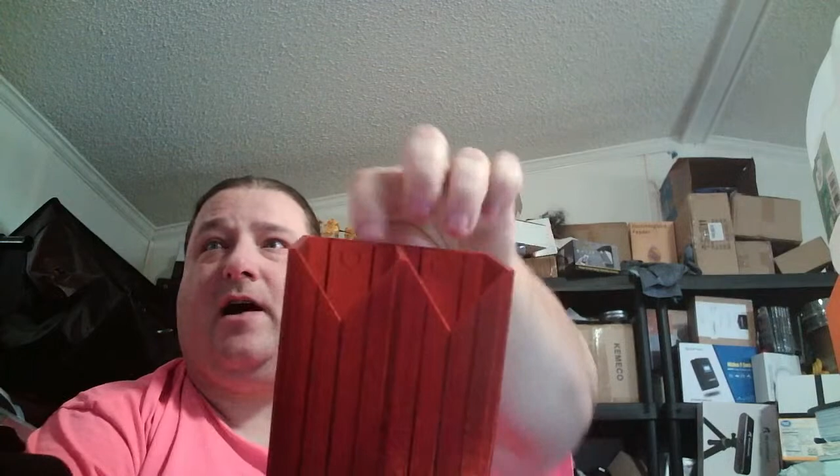But these files are all updated. I also did a 2 wide one because I actually need to have 2 wide for that little tiny wall I plan to put it on. So that is all done, all good. Because this one's only 2 wide, I have 2 spots for you to put screws in. So you could do one here, or you could do all 4.

But now it prints perfectly in vase mode with no gaps, no issues. This prints in about 6 hours. Anywhere between 5 and 10 hours, depending on how slow you run it. But yeah, that printed absolutely perfectly. I might round off some of these edges just to get rid of the sharpness at least on the bottom. I might actually do that, but that's just fine detail stuff. That's not super important.

I also might project these tabs out back a little bit because there's trim on the wall behind this. Although this might just flex enough that that's not a problem. But yeah, I'm gonna print like 5 of these and put them along that wall where the fridge is, and go from there. And the 3 one is updated. The 6-spot table one is all updated. So I'm gonna call that done.

Yeah, it's almost like the gremlins put it back out of fear for their lives. It's like, I'm gonna eat you if I don't find those things. It's only a 1,500 square foot house. Where the hell could the stuff be hiding? It's like, where can it go?

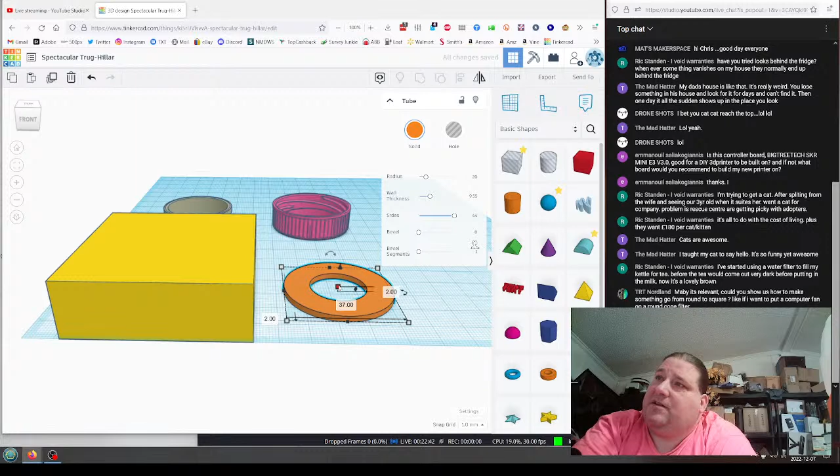So here you have, let's see, what's the normal size? The normal size would be a 40 millimeter fan. So let's say we have a 40 millimeter circle shape and we want to mate that to a 60 millimeter square. Let's keep it short like that just to keep it easy. So I want to mate this kind of shape to this kind of shape. And I want to create an adapter to go from one to the other.

So how would I do that? There's a couple different ways to do it. The simplest is to just use a cone and then cut the sides of the cone. And I'm going to show you how to do that. So let's line these two up. Let's say I want to go from this shape to this shape. So I want to mount this square hole to this round hole. And this is the dimension of my round hole, and this is the dimension of my square hole. So I'm going to put a plane on top, and also get your distance. Get whatever distance you want.

I've never seen a cap permanently attached to the bottle. So that's either not common in the US or not common in my part of the US. Remember, the United States is as big as the entire European Union. So you got to think of our 50 states as 50 countries. But I have never seen a cap. Yeah, basically. But I've never seen a disposable bottle come with an attached cap. I've never seen that.

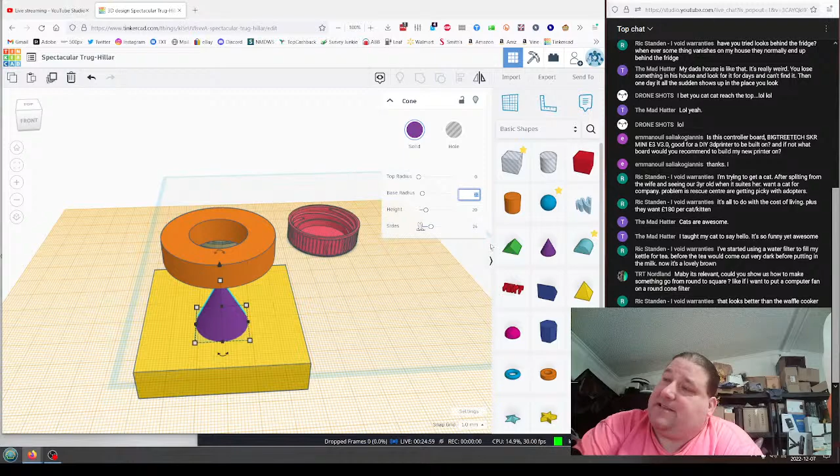Okay, so what I would do is I'm going to take a cone here, and I'm going to make the bottom of the cone bigger than this square. So let's make the base radius 30? No, 40. And we want to make sure, okay, it's not big enough. Let's grab all these and line them up. So you want to keep making this circle bigger until it's as big as the square. So base radius, let's go to 45. There we go. We are now bigger than the square. All right. Let's increase the height.

We could actually just do this. We could increase it until it covers it up. But before we do that, let's put our cut on top here, right there. And then what we do is we keep increasing this until it just covers up the part. Just like that. Now we put a cut box like this to get rid of the excess off the top. Make sure you have all four sides. Okay, there we go. We have our tool there. I'm going to lift this up a little bit to separate it.

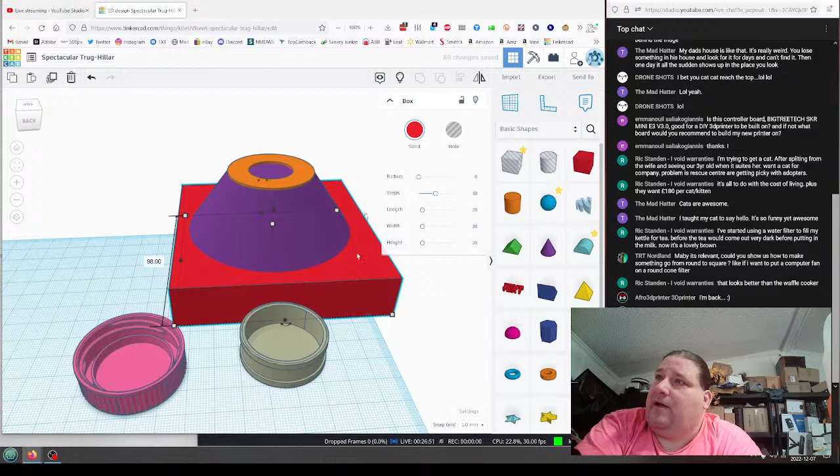Now, I'm going to take this and duplicate it. I'm going to hide one. I'm going to turn this into a cut tool. I'm going to put another square down here, overlapping slightly. So now I need to make this bigger than the purple box all around. Okay. And I need to make this shorter than the box in there. What I'm going to do is I'm going to join those two boxes there, which is going to put a hole inside the red box.

I now take the red box, extend it all the way up through the purple box, turn it into a cut tool, and you can see what's going to happen here. See, it's going to cut away all the chunks of the purple that are bigger than the square. And there you go. Bring back the yellow. And now, as you can see, I have an adapter. You'll have to fiddle with dimensions and stuff like that, put a lip on it, stuff like that. But you get the basic concept now. I now have an adapter that will go from this shape to this shape.

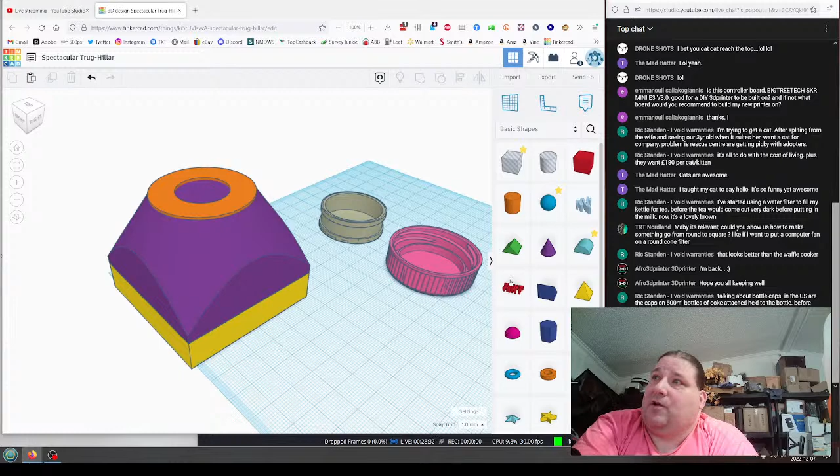Here we go. So that's how I would make an adapter to go from one shape to another. Now you could also make this finer if you want to. There are ways you can do that. So, for example, I could take one cone. Let's make this a big cone. Let's make it bigger than that. Make a big cone. Now watch, this is kind of cool.

Okay. So we're going to take this cone, we're going to duplicate it. Then we're going to raise this cone up 3 millimeters. Let's do a 2-to-1. So let's do 4 millimeters to give me a 2 millimeter wall thickness roughly. Yeah, that's good. Take this one here, make it a cut tool. And now join the two together. And now I have a hollow cone, which I can then put over top of these pieces like this.

And now what I can do is I can lower this cone over top of this and start chipping away. See how it's starting to chip away at different parts of the model? I can stretch it out if I want to change how it cuts away at the model. And you could do things like this to fine-tune the shape that you want to give your final part. And just make your wall thicker to cover parts sticking out like that.

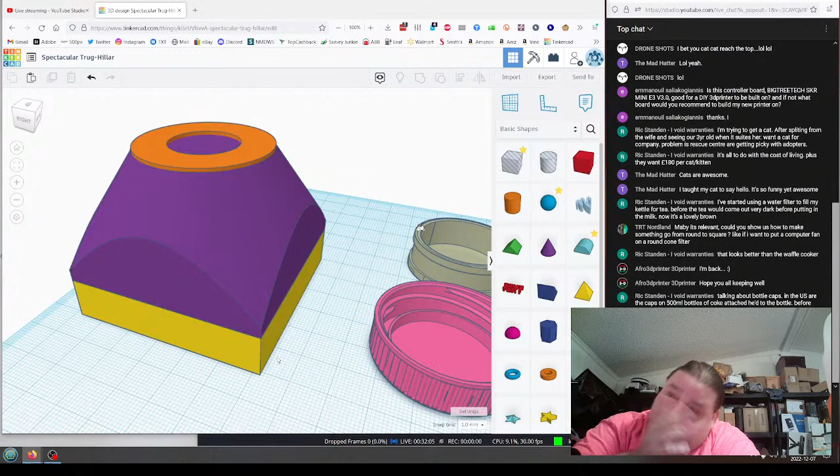Now, a couple other things you might want to do, depends on if you're going to vase mode print this. If you make this exactly the right size, you don't need to do this. But you could also put a small cylindrical section here if you need it. So either an insert or a cover. Same thing on this end. Whatever size opening you need. But this gets you roughly what you're going to want. I'm going to put that over here in case you have any more questions about that.

No problem. So, I want to make a funnel. So here's the screw-on cap. And here is this cap. So how does this work? I can't see what that's trying to show me. Let me try taking a picture and zooming in. Let's go high resolution for 48 megapixels. Let's use some light. Okay. Let's see what that looks like.

I can't really see it. I think I need to use a macro shot. Let's go macro. That's going to use this camera over here. So let me clean off that lens. Cell phone lenses always get dirty.

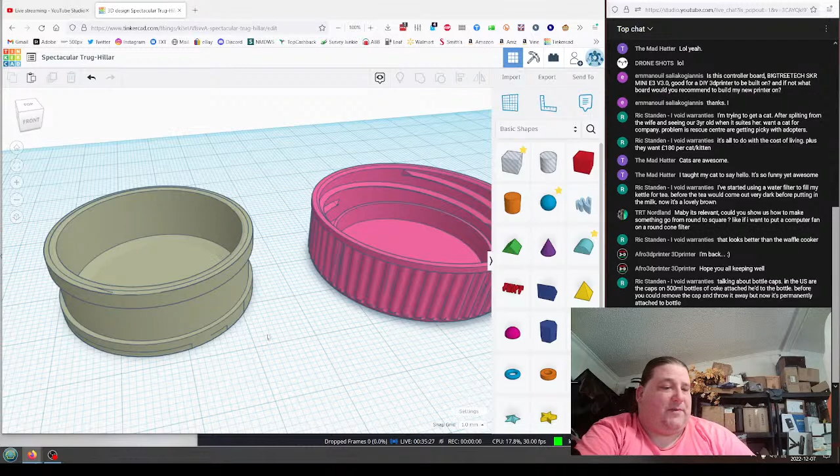Try not to be too noisy, okay? Sorry, I'm just trying not to be too noisy.

And it looks like the cap itself is just a lip. And it looks like it creates a seal around that part there. So that's how it creates a seal. Yeah, there is a small little dimple on the inside. Okay. You guys see what I see?

Yes. So the simplest beginning would be to simply put a cylinder over top of this. That is not what I wanted to do. That's what I wanted to do. Lift you up. Let's increase the number of sides. Why does it go to the opposite? Did you guys see that? I moved the mouse to the right and the freaking slider went to the left. I will never understand how that kind of crap works. Like, what programming syntax results in that?

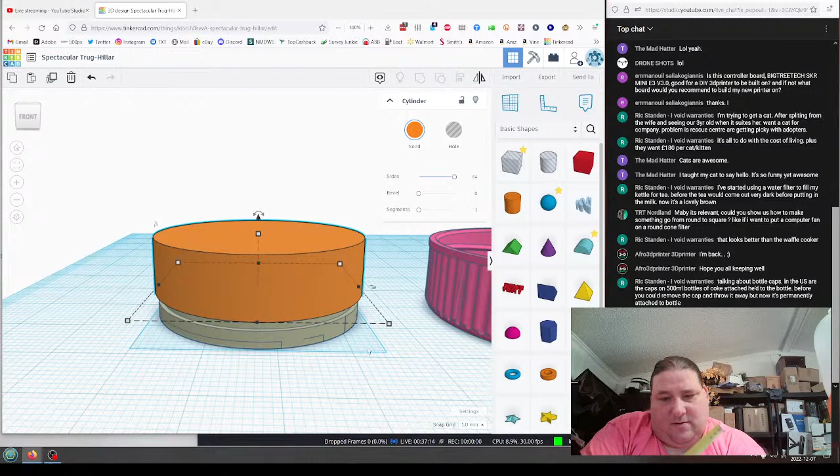Shift so we can scale it up, and we want to cover up the entire thing. Okay. How thick is this? Looks like the inside is actually deeper than the outside. And we go 6 millimeters. So let's make it 6. And we want to go by 0.5 millimeter increments. Okay.

So turn this into a cut tool and join them. Okay. That gets us pretty close. Let's bring you down to 0. Let's change your color. And let's put a cut tool in the middle here. This is arbitrary because it goes on the inside. So how big this is isn't super important.

And we want to lift this up. Let's go 1 millimeter high. Increase the number of sides. Let's align this. And now I should be able to do that. Okay. So that gets us roughly the shape we want. And if we make this transparent, we can see inside here. So something I want to do is I want to bevel that, but do I need to? Or is the bevel on the bottle itself enough?

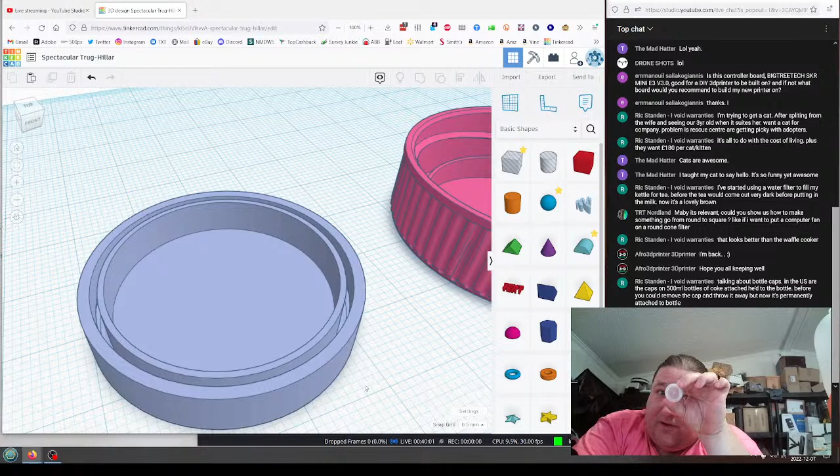Meaning, will that fit? Now, I could just use an existing cap. I could just cut the center out of that cap right there. And then I could design my cap to slide right into the hole I make by cutting out that center. And then just hot glue it together. But I'd rather print it.

The question is that... I guess the only way I'm going to be able to find out is to print it. Now the good news is I should be able to design the funnel separate from the cap, so I can edit the cap if it doesn't fit right.

No problem. Good luck, DeWet.

And my fit doesn't have to be perfect because we're just making a funnel. So how big was that? So 28.75, which means I can punch straight through this. Like that. Okay. Now let's build a funnel.

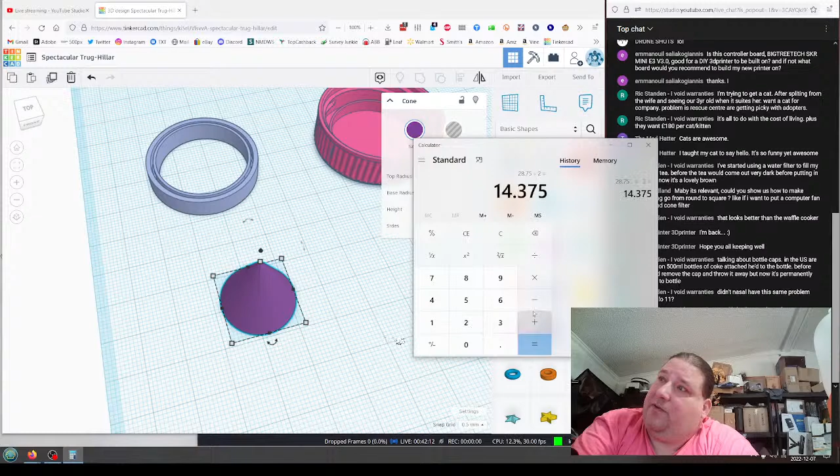28.75 divided by 2 is 14.375. But actually, no, I need the hole to be 28.75. I need the funnel to be the size of the entire cap. So 34.55. 34.55 divided by 2 is 17.275. So our top radius is going to be 17.275. And our bottom radius is just going to be bigger. So that would be fine. And that would be a good height. Let's make the radius a little bit bigger just because we can.

Put the plane here. Bring this up. Bring that down to 0. Really? Go away. Center you there. Be a pain in the butt. Okay. Let's change that color since that's a pain in the ass, that color. And that is a more than big enough spout.

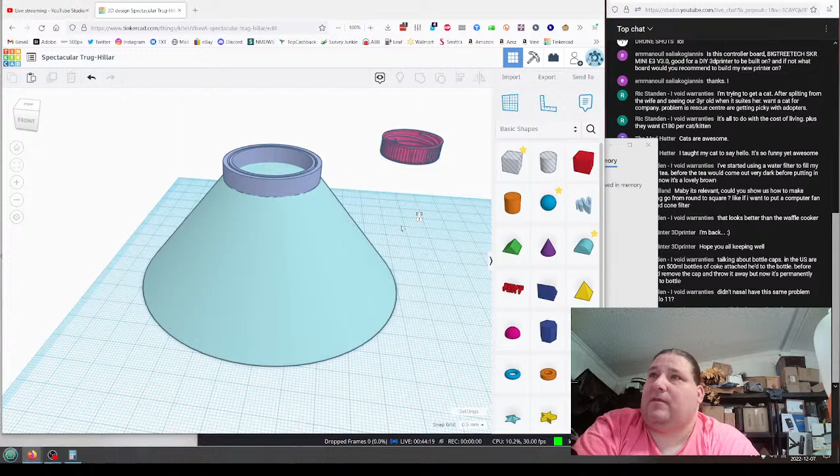Okay. Let's see here. How do I want to do this? I'll use my vase mode trick to give it some thickness. Which means I need to put a... so this needs to be... seriously, come on. What's that?

Oh no. How do I want to put the cone shape in place? I think I just need to... see, the problem is I created this shape. And I think to do what I want to do, I need to use a cone. Like an actual cone.

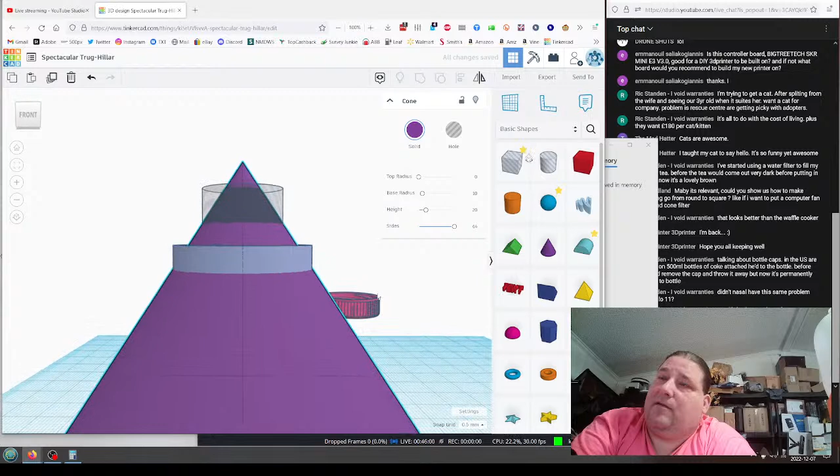90 by 90. Now let's center everything. Okay. Okay, that takes care of that. I don't need that right now. Okay, now what I need to do is I need to duplicate this, change its color. I need to move this. This one's the right for the outside. So I need to hide this one. I need to bring this one back. I need to center this one again without moving this.

And then what I need to do, why would you do that? Where the hell did you even come from? I hate when it does weird things.

So, we need to lower this until it touches that. Turn that into a hole. Restore the other one.

Seriously? Seriously, you grabbed it? No, you didn't. It's over there. Okay. I was about to get real nasty and bite it.

There we go. There creates the wall for my cone. Alrighty. Now I need to chop the top off. So let's go away. Hide this. Put a work plane here. Put a cube here. Put the work plane on top of the cube. Restore the cone. And now cut the top of the cone off.

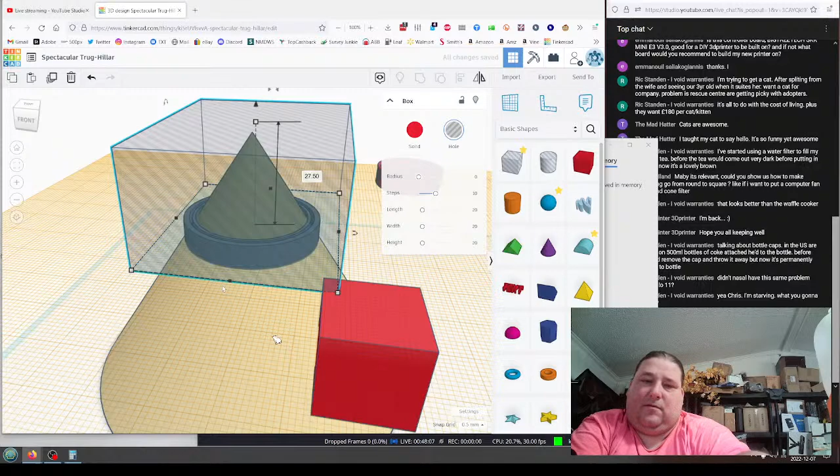We are making a funnel that will snap onto the top of these water bottles so that when I distill my own water, I can make it easier to pour the water into these things. These water bottles don't come with the threaded caps like your normal milk jug comes with. And you don't want to use milk jugs because you're going to get that milk protein in your water. So these come with the push-on, push-off caps, which nobody has modeled, so I'm trying to model it.

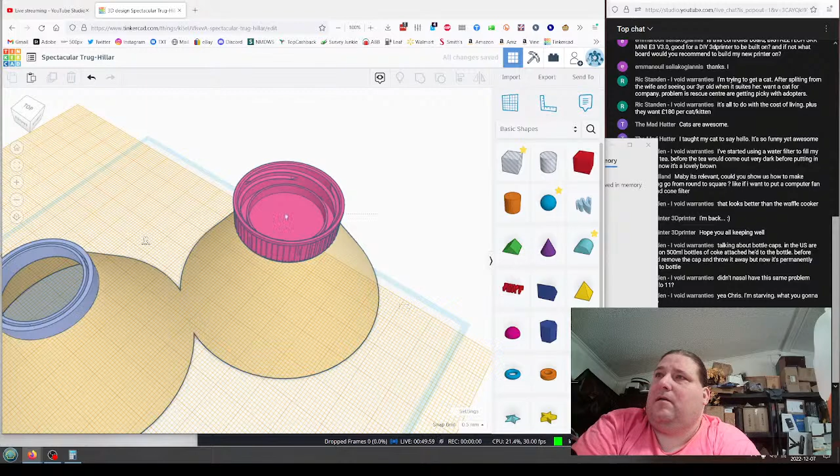Okay, so now I can delete this. Put the work plane back down here. And now I have a hollow funnel that fits the milk jug cap. And I think that'll work. Okay. Well, let's put the work plane back here because I can do the same thing for this one. 0. Control D. Okay. There we go. And now I just need to put a hole in the center of this.

Okay. So now should just be able to scale this up until it's the size of that opening right there. Join those two together. There we go. And that looks good. Although that might not print too well. So an easy way to fix that is to put a donut in place. We will shift that donut down like this. Sides. Let's center everything again. Center, center.

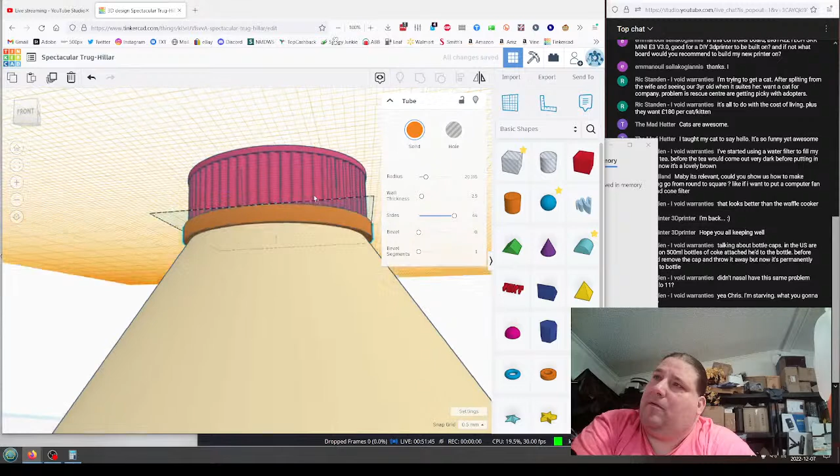So we take this and we extend it. Come on, work with me here. There we go. We extend that into that one. Change the radius to 19.8. Let's go 19.5. That works for me. Although it is poking its ugly head in here, which we don't want. But there's a way to fix that.

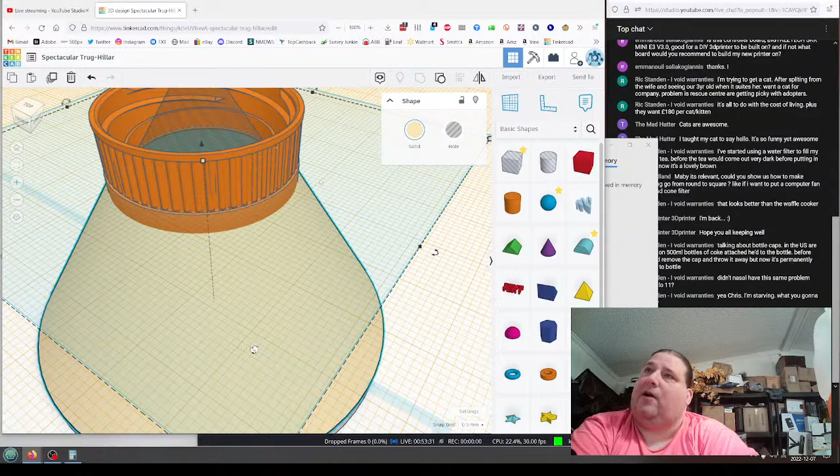We take this, we decompress it. I need you to go away. No, I need to decompress you again. There it is. Okay. You need to temporarily go away. Let's increase the wall thickness just a hair. I should be able to join the orange with the pink. Let's restore the block. Let's join this with this. Why didn't that work? Join this. Oh, I did. It did work. And now if we join all three of these, we'll get our cut in the middle there.

There. Now we have a threaded milk cap attached to a funnel. Now I do need to do one more thing. How do I want to do this? Let's join this one together since we're pretty close to what we want. Now I still need to create the aeration. I need to allow air to get through there. I think the easiest way to do that is to use the side here. Like that. Yep. Now we take a tube. We're going to have to rotate it 90 degrees.

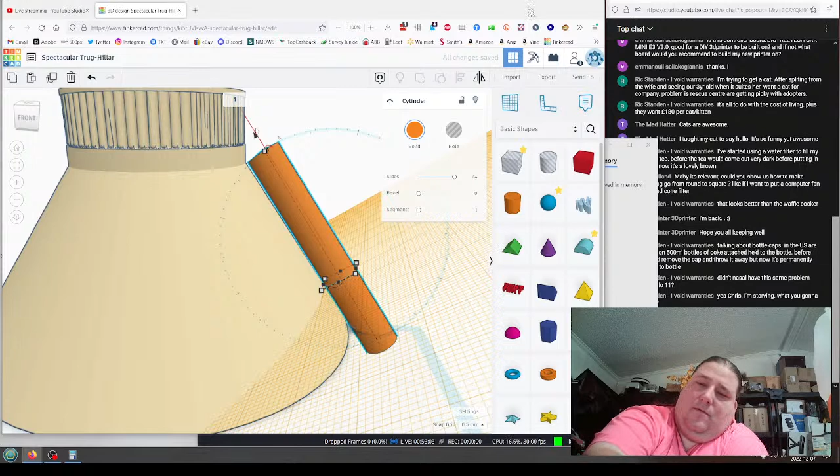Put the work plane here. There we go. Sides. Come on. Come on. Just grab the goddamn thing. So let's make it, 8mm should be enough. That is not sitting at the right angle. Well, isn't that interesting? I thought I got the angle right. Oh, it's between 1 and 2 degrees. That's close enough.

So now I bring this in here like this. Flip it over. Let's align these this way. Okay. Why doesn't that look centered? That does not look centered. Let's try a different method.

Jesus Christ, stop it. Why does it do that? Why does it go left? I don't understand why the hell it does that. You're going to get bitten because I want to bite you. You exist.

Okay. I might be able to just do a straight tube straight through like this.

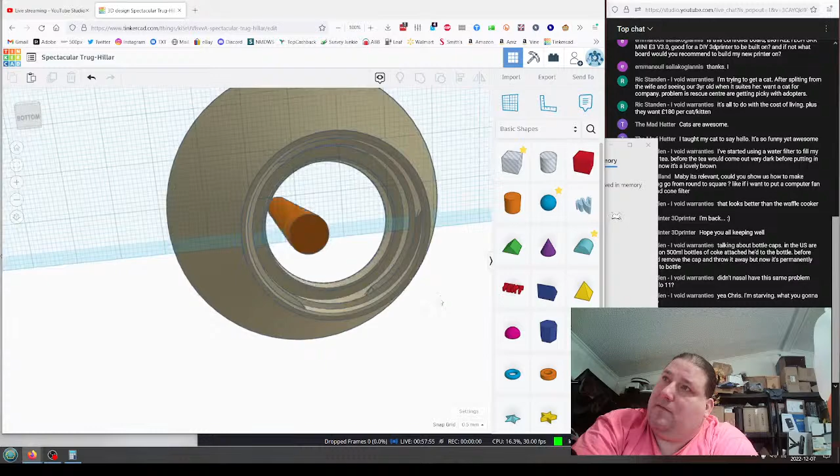Okay, so now I should be able to rotate this way. Okay. No. All right, that's looking good. Okay. Ow. Can I make it? I'd like to fatten it up. Yeah. I like that. Let's make sure it's still centered. Okay.

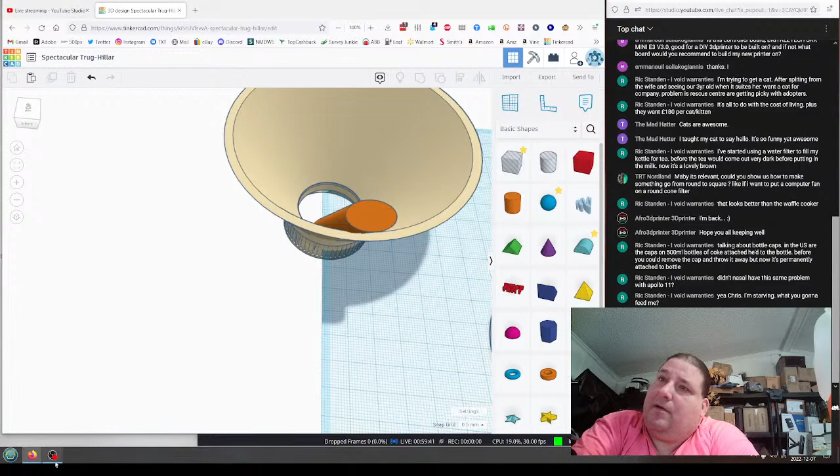Don't need that. Do I have the right screen on for you guys? Yes. Okay.

Get you out of the way. Bring you into the middle here. Let's put you on the end cap here. Control D. Let's change you to hollow. Let's increase the length like so. Let's hide you. Let's grab your center point and make you bigger.

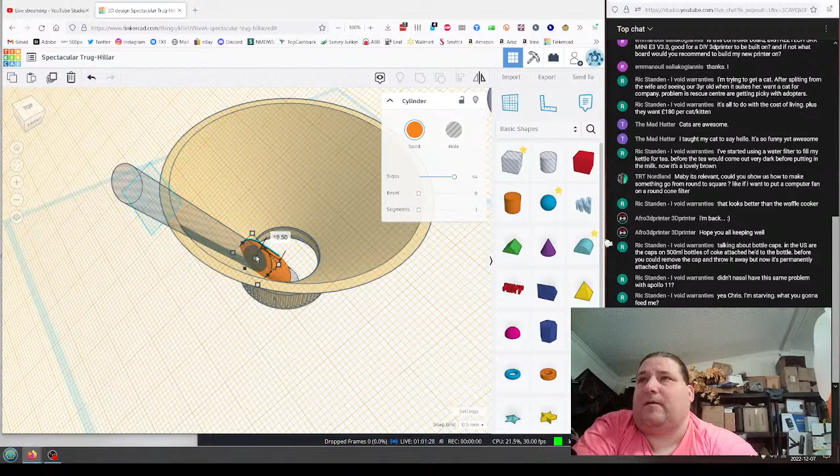Yeah, it's a little harder than I thought. I think what I need to do is to shrink you. Got it. Nope. I don't got it. There it is. Now I need to make you bigger so we have some wall thickness. Now I can make you longer. Okay. Live with that.

Join that together. Okay, let's put a plane here. Nope. Put a plane here. And chop off the top of this tube. Okay. That gives me that. Then... Nope. Okay. Come on, work with me here. Why are you fucking with me?

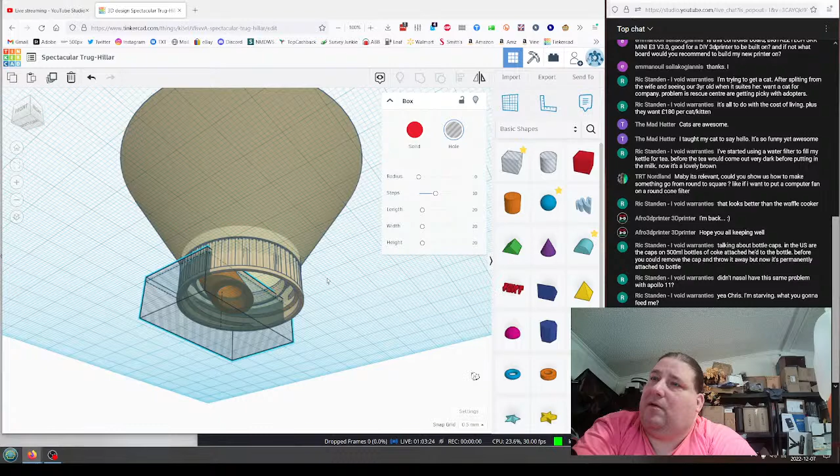Boy, sometimes just trying to grab pieces of things in Tinkercad can be such a pain in the butt. It's like, play nice or else I'll kick your butt. Wait a minute. I know what I need to do this. I don't know if I can do it. I want to try though. It's not what I want to do. What? Oh, I know. I know what I need to do.

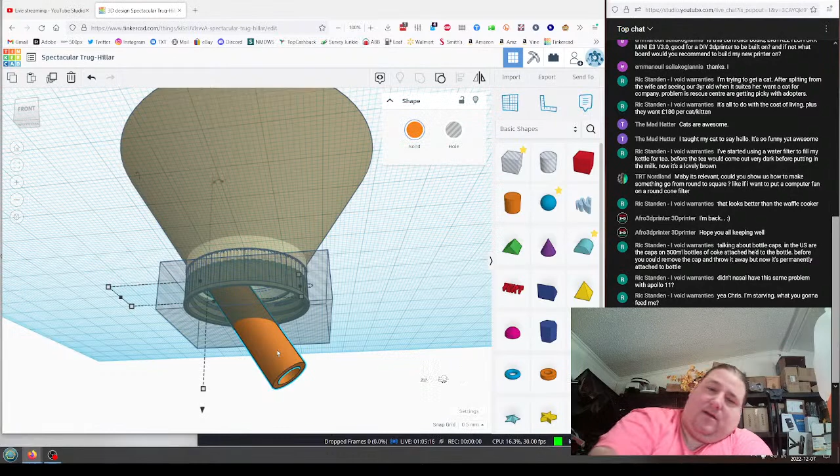Oh, it doesn't want to play nice. God, it can be such a pain in the ass sometimes. There we go. Man, can be such a pain. Go. So, I need to chop this into 2 pieces. Okay. Control D. Now I have 2 of them.

So I need to take this and this and chop it in half. So now I take that box and this piece, merge them. But I forgot to duplicate it first. Control D, merge it with this. Now we take this and we flip it this way. And we merge that one with the orange one. Come on. Figure it out. There you go. Now, here's the cool part.

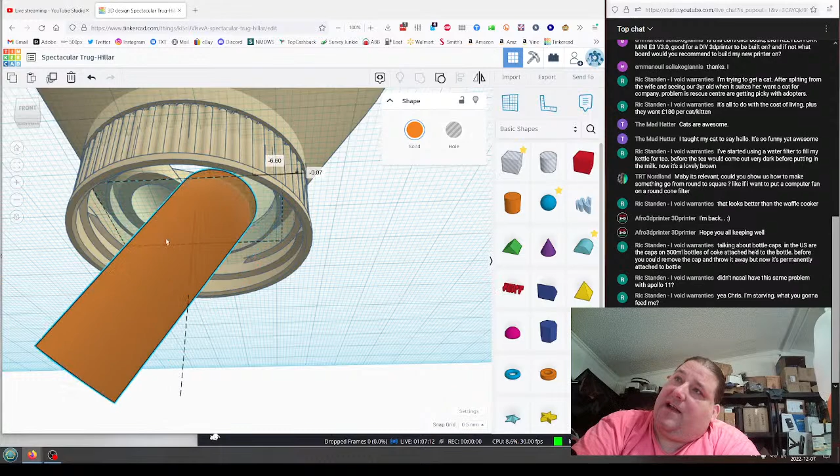Now I could take this and I could rotate it 180. That didn't work as well as I thought. I thought that would have worked. Oh, it would only work if it was a 45-degree angle. See, I was going to have this line up with this to create a spout. But that will only work... It's not going to line up perfectly, but I think I can still do it.

If I create a plane here. Now I take this piece, I get it vertical. And then cut the top off. Bring it in line. You get out of the other damn part. Thank you. Okay. Now I could bring this into here like this. Not perfect. But I should be able to get pretty close. Doesn't have to be perfect, just has to be close.

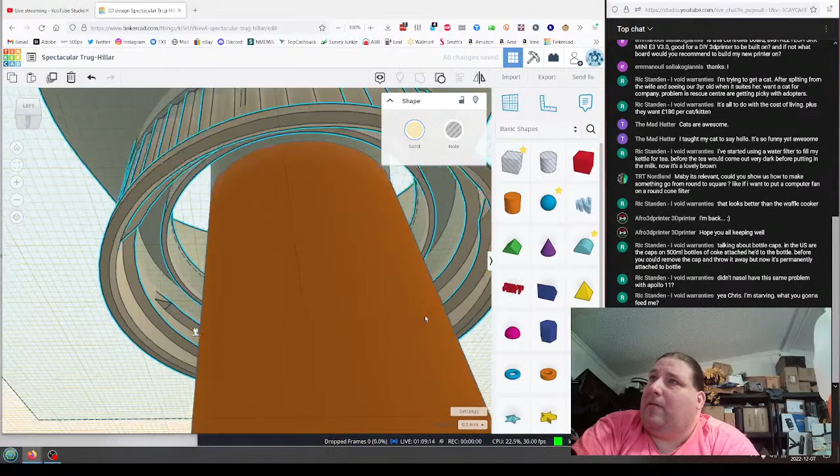There we go. There we go. So now the air has a way to get back out of the bottle, which will let me fill the bottle up. Now I should be able to take this, Control D it, and I should be able to use it for the other one. Then bring this up to 0. Then rotate this around 180 again. Let's get them lined up this way. Then I should be able to bring you over here like that.

There. Now both caps have the needed aeration. Okay. So I should be able to join those together, and I should be able to join these together.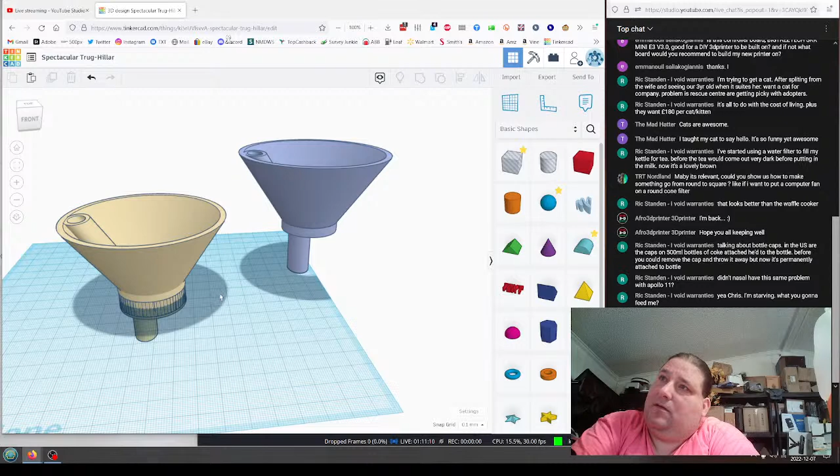I have these bottles. Well, let me show you. Come on. Here we go. So I have one of these. Go away. So I have one of these that allows me to distill my own water so that I don't have to go to the grocery store and buy water for 35 cents a gallon. I can now make it for 24 cents a gallon in my own home.

So you put tap water in that machine, it distills the water and fills the carafe. Well, the problem is I need to reuse that carafe. So once I've made the gallon of water in the carafe, I've been putting it into gallon water jugs. Now the problem is gallon jugs come with two different kinds of caps. Your classic milk bottle has a screw-on cap. Now these are available. I can download this cap off of Thingiverse and modify it to my heart's content.

The problem is you don't want to use milk jugs for water because it's not possible to get all the milk out of a milk jug. The plastic itself absorbs some of the proteins and polymers and stuff that are in the milk, and the distilled water is going to extract that material from the bottle. So if you ever rinse out a milk jug and then come back a week later and sniff it, it still smells sour because it still has a tiny residue of milk in it.

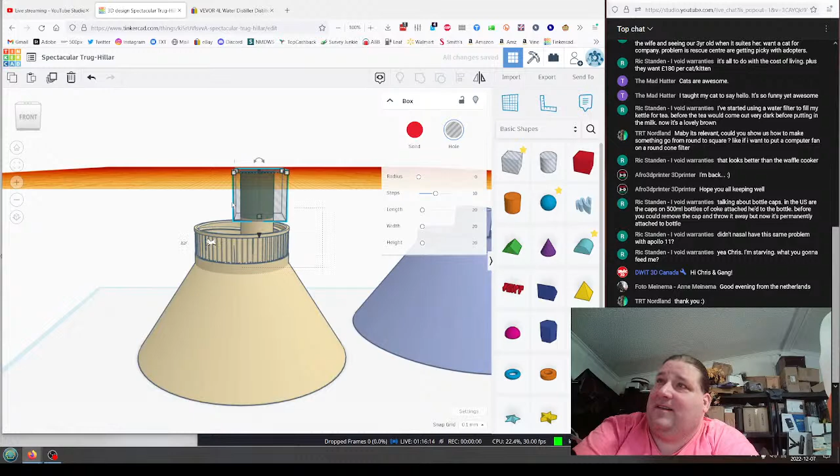And then Tinkercad does stuff like this. Why? Why? Like, this doesn't exist. Why is that there? That should not be there. That's something Tinkercad added. And it does that every now and then. It'll add its own artifacts. This is not part of any of my models. This is not something I missed. This is an artifact Tinkercad added. It's really annoying when it does that.

Notice how this one doesn't have it? It's the same damn model. Literally, I copied it and put it over there. And Tinkercad added that. This one's probably going to be just fine. This one I'm going to have to print this section here and test fit it a couple times and, you know, tweak it until I get it to fit right.

Maybe the PET, or no, this is HDP. What is this made out of? Is it HDPE, I think? I forget what this is called. This is not PET. This is HDPE or something like that. It's a different material. But I'm thinking that might be soft enough that as long as I get it close enough, I'll be okay.

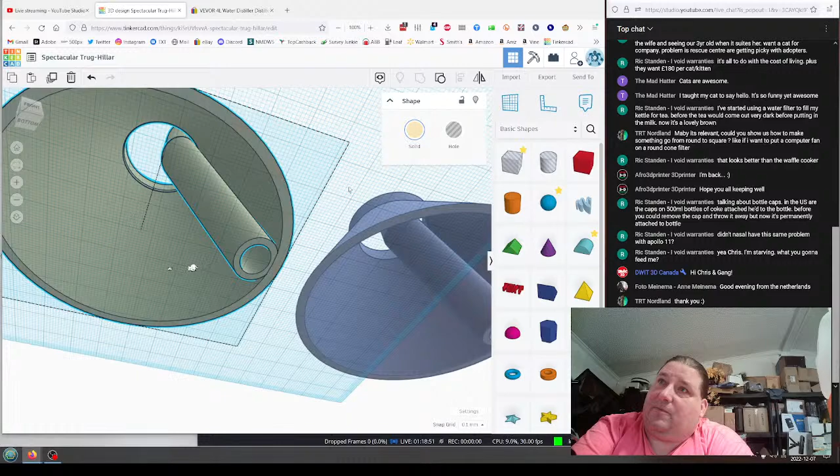Which means I'm going to need to add ribs. Because if I don't have ribs, then it's not going to work properly. Let's see, how would I do this? Let's pick our height first. That should do it right there. We'll vase mode until we get to that point right there. And then I'll invert this, and I will use that as a cut tool later.

Okay. So the easiest way to do this, and that's annoying. If I do this, so it's 58.6 millimeters tall. Is that at the 0 point? I did not want to grab. Sometimes it can be such a pain in the ass to grab 0. Oh, it's totally off now. How did that happen?

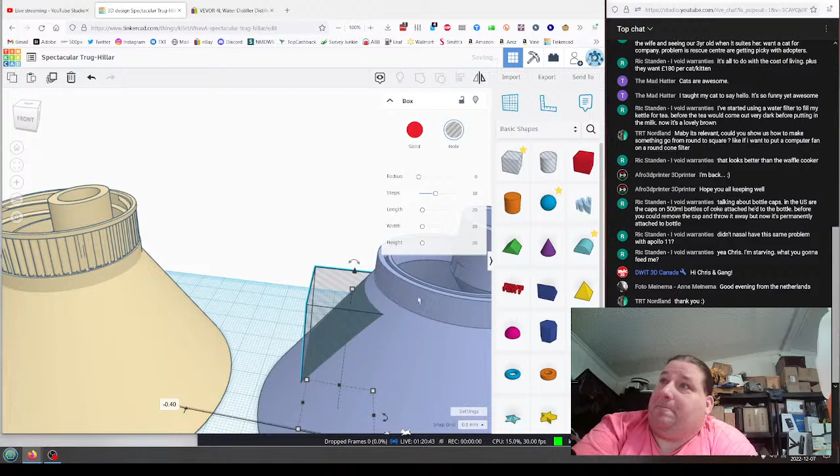39 millimeters. Is that the same for this one? No. Well, you know something? You're going to be the same, because I don't want to do you over again. Okay. Control D. Come on. You always miss some. Flip it. Yeah, see? Missed a little bit here, too. Always. There. Now they're the same height, whether they want to be or not.

So 39 millimeters will be my cut plane. Now the easiest way to do this, Control D. Split it. Split it. Split it. It's got to get in my way every time. There it is. Now I join that back together again. Okay.

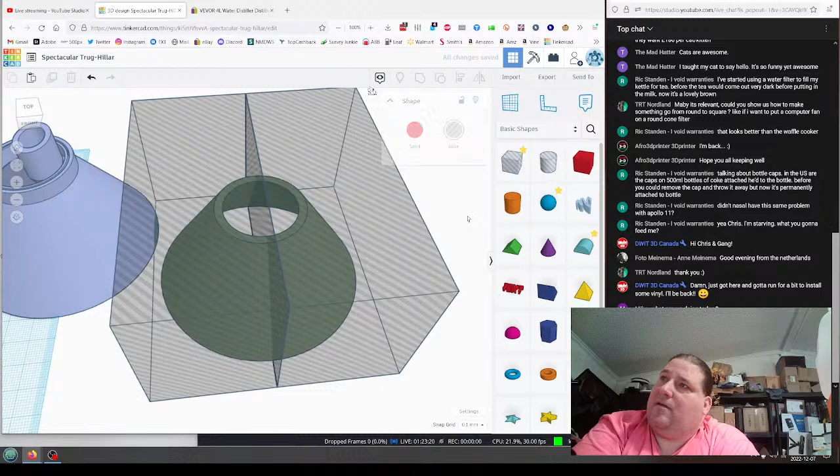Control D. 46.6. Okay. Okay. Join those together. Center. And join all three together. Now I have my cut tool. Though, no, I don't. I gotta do something else.

Okay, let's hide you. Let's split you again. Let's split you again. Come on. Let's split you one more time. There it is. So hide you. I need to delete you. Bring it all back. That should do it. I should be able to just join all this mess together. And there it is. There's my cut. That's exactly as wide as this is. Now I need to split this in half.

Okay, how do I want to do this? What I need to do is I need to put a box here like this. What I need to create now is my ribbing tool to put ribs into the part. I can't scale this part because this part has an angle. And if I scale this part, this distance is going to be different than this distance. So what I have to do is I have to cut this in half and then move the parts together.

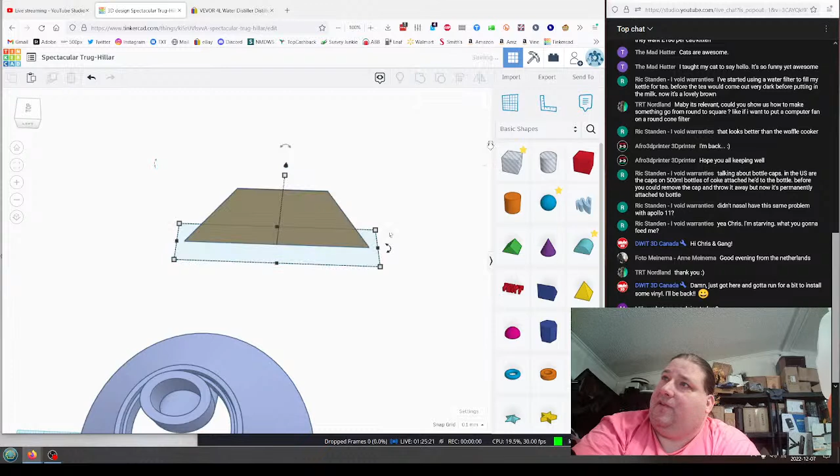And the way you do that is you take a piece like this, you Control D it, 47.2, you temporarily join the two cut pieces together. You have to make sure they're the same size. Then you align them this way. Then you split the two cut pieces apart again. Okay. So now I have 2 cut tools.

What I have to do is hide this because I need to duplicate this, Control D, and change its color to a different color. Now I can take the green one and this one and join them together. Show me everything again. And now I can take this side and the beige one and join them together. Now I have the 2 halves, and it's still the exact same shape as this.

What I need to do is I need to shift the part 0.8 millimeters left and 0.8 millimeters right. So I grab this piece here, I hold down the shift key, I drag it this way, and this is a relative dimension. I've moved this 0.77 millimeters from that point. So I need to move it 0.8 millimeters. Actually, let's do 0.75. I want a little bit of overlap. All right, and then I do the same thing with this one.

I grab this, shift, move it that way, negative 0.75. Bingo. Now you see they overlap. So these two remain the same relative distance from each other. Now I join this together. And now I have a cut tool to put ribs into the circle here. Now what I can do is, how many do I want? How many ribs do I want?

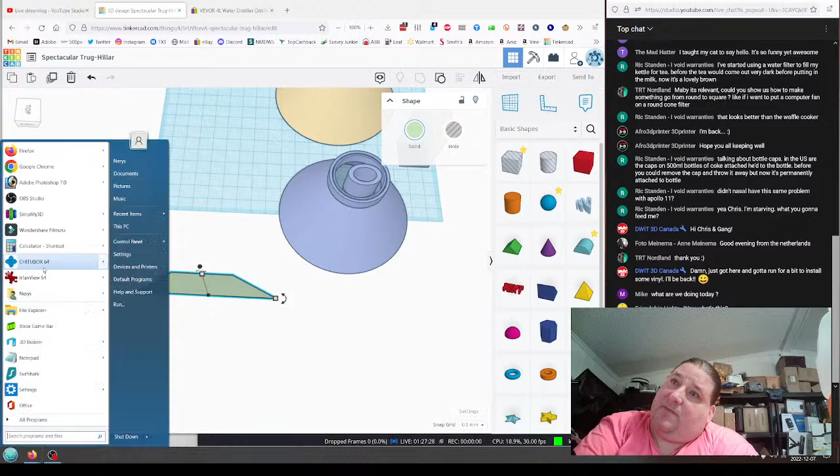Let's do, let's see, what, 30 degrees? Let's do, no, 8. 360 divided by 8. 360 divided by 16. That would be 22.5. So now I Control D, and I rotate 22.5, and then I hit Control D again, and again, and again, and again.

That's probably too many ribs, but I'm going to leave it. This is going to get manhandled a lot, so I want this to be relatively strong. Okay, and now we need 1 rib to pass straight through the wall, but also not pass through this piece here. So what we're going to do is we're going to temporarily join these together. I want to make these a distinctly different color. Make them pink. Let's join them together.

And then Control D it. I need 2 of them. And I think it's still processing. Yeah, there, it's done. Let's grab this and this. This one goes in here. Now, even though these are not symmetrical, their outer surfaces are symmetrical, so I should be able to simply align these. Okay, there we go. Now what I need to do, I only have to remove 1. Good.

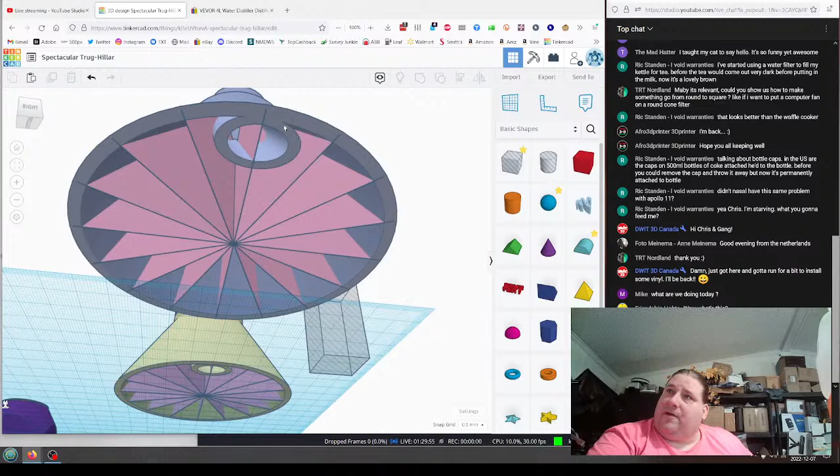So what I need to do is separate this into its individual pieces, duplicate this piece, and move it out this way, because I need to also cut through the outer wall of this one. See? So now I've joined this surface with this surface, and I've joined this surface with this surface. So that should give us all of our structural ribs, as well as, let's rejoin it with this. Oh, I didn't join them all. This one, with this, with this, with this. Join.

Okay, we still need to join with these. What am I missing here? Oh, there it goes. Okay, we're still missing the pink one here. Got it. Join that with this. And then turn this. Oh, wait a minute. I forgot to get rid of the other halves. Hang on. How do I want to do that? This might work. Okay, so I just need them not to pierce this.

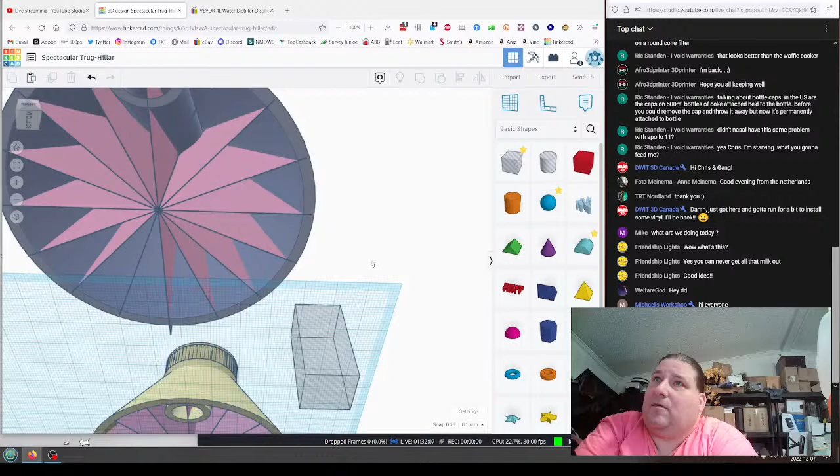How do I get it to not pierce that? I'm trying to think of an easy way. The easiest way is just delete these three. But I have to delete this one. Oh, that one looks like it's not puncturing. So I only have to delete these four. So I'm just going to do it. Okay.

Okay, so I can delete this one. I can delete this one. Then I need to separate these two. Delete that one. And delete that one. There. It's going to leave that a little weak, though. So a better solution would be to trim these so they don't puncture this. What is the easiest way to do that? I need this one, so I want to leave that one.

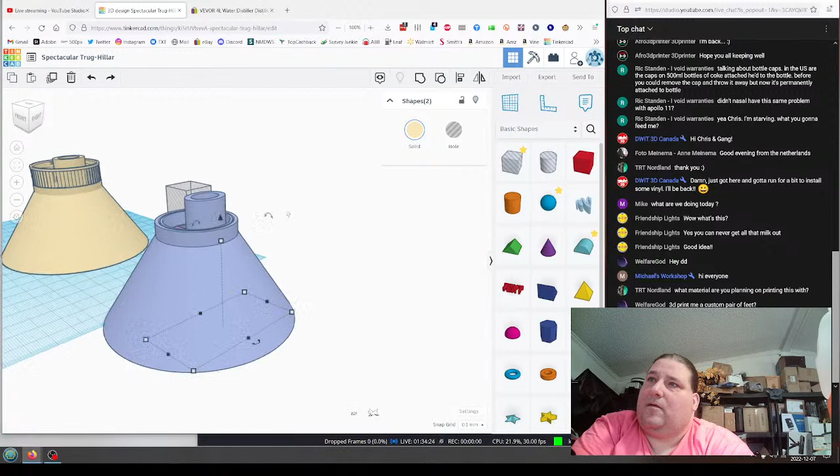I could just shorten them. That'll work. I'll have less ribbing, but it's okay. It'll still hold up fine, I think. Yeah.

I don't need a charcoal filter. It's pure distilled water. It'll be fine.

What I need to do is make this transparent so I can see what the hell I'm doing. So take this and this. Let's join them together so it's one piece. Yeah. Flip, please. Thank you. Right there, it cuts. Right there, it doesn't. There. Okay. Wait a minute. Oh, I can't do that. I forgot I can't do that. It changes the shape. Duh. Did I get it back? Yeah, it's all back. I have to chop the top off. I can't change the shape.

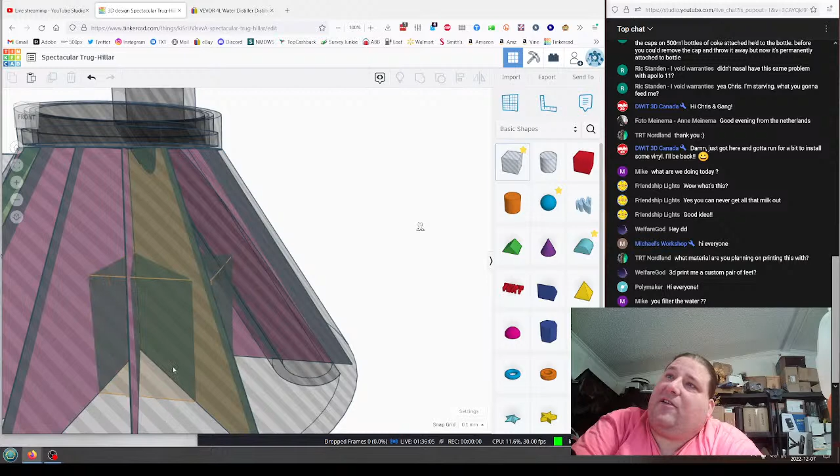There. I see the level. I see where I have to chop it. See right there where it pierces the cylinder? Okay. Tinkercad is just nice because it's visually intuitive. So all I gotta do is get close. I just want some ribbing. Okay.

Now I need to make it cover up all that. There. Now I just join that with this. There. Now it no longer pierces. It only cut one. You dirtbag. There we go. There. Now it no longer messes with the cylinder. Now I can bring you back to a color.

I eventually got to get myself some of that poly-light material, that expanding foam filament to make ultra-light components. I got to start playing with that stuff. See how light I can make nose cones for rockets and stuff like that.

Let's see. All right, that should do it. So I should be able to just select the whole entire mess and then just unselect this. Join. Turn it into a cut tool. And there we go. That should do it. And join.

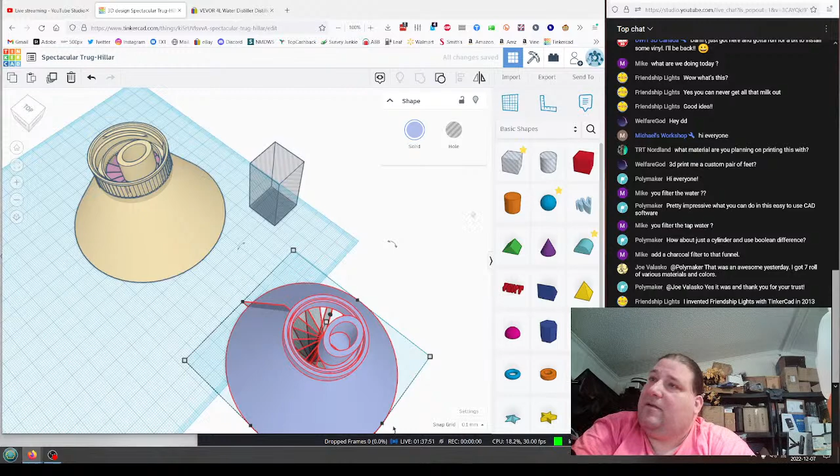FlashForge makes some good printers. They're slightly proprietary in some ways. They could be a pain in the butt to work on because you got to take them apart a lot. But they're just reliable. They're noisy as hell, but they're just good, reliable machines. I have a FlashForge Guider 2, and then I also have what looks like a clone of the Adventurer 3. The only problem I had with the Guider 2 was I jammed up some PETG in it because I kept the doors closed and the PETG softened inside the extruder, and so it just started acting like rubber.

But once I realized what I did, yeah, well, because the plastic shell acts as a speaker, so those normal sounds that a printer makes are suddenly amplified, because you're inside of a big sounding chamber that plastic enclosure makes. Oh wow! No. I love my Guider 2. It's 50 feet away. In fact, my Guider 2 right now is outside in a container. But they're good machines.

Okay, that is it. That should print with Vase mode. So the first 39 millimeters will print with Vase mode.

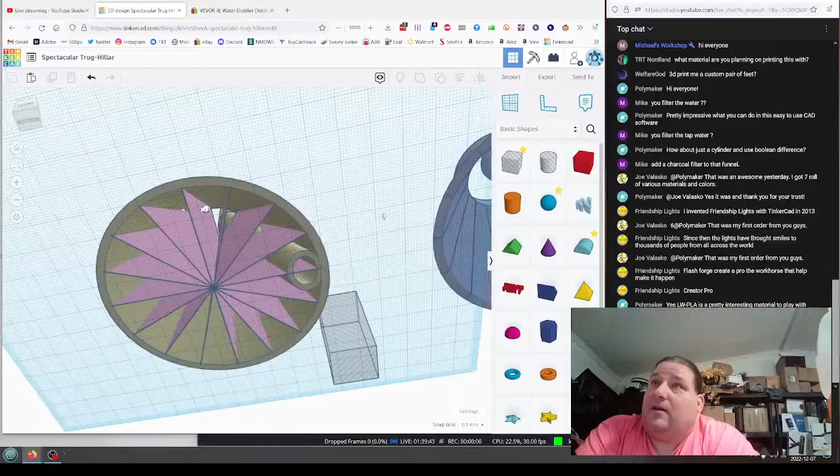Okay, so now we need to do the same thing to this one. What I should have done was duplicate this, but whatever. So now we Control D this, slide it over. That cuts through that wall, and now we need to get rid of the overlap. So we make that transparent so that we can see the overlap. This one doesn't overlap as bad.

So this is a slightly different, wait a minute. Oh, this doesn't work at all. The cone's a different shape. Okay, so we got to start from scratch on this one. I somehow made the cone a different shape. See how the parts don't line up? That means everything's probably different. Okay.

So select it all, unselect this, delete that. That's annoying. Those cones should have been the same shape.

This hobby is amazing because the thing I love about 3D printing is it's multidisciplinary. To me, that is the most wonderful thing about 3D printing. You do battle bots, you can use 3D printers. You make model airplanes, you can use 3D printers. You get into electronics and enclosures, you can use 3D printing. You get into rockets, you can use 3D printing. You need stuff to organize your house, you can use 3D printing. It's a multidisciplinary hobby. It's like a general purpose tool that can be used for anything.

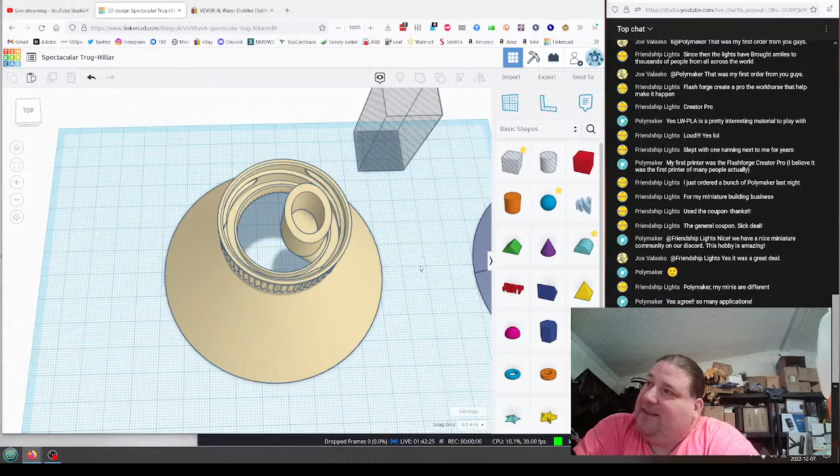And of course the material selection. This plastic is beautiful. This is Blood of My Enemies Red from Alien 3D. And oh man, I only got 2 rolls of this. It's gonna suck when I run out. Very cool.

Okay, so the easiest way to do this is just to chop this booger in half. So let's just do that. Although that's going to make it a whole lot more complex, which we don't want to do.

Protopasta makes some extremely cool filament. You're going to pay for it, but it's very cool.

Oop, I got almost all of it. There it is. So I should be able to delete this. Delete this, delete this. There we go. There's our cone. Now, first thing we want to do is we want to chop it off at 39 millimeters.

We have our 39 millimeter tool right here. This one can actually go higher, but I think I'm still going to stop it at 39 millimeters, just to keep everything the same.

Alrighty, now we do the same thing we did before. We have to split this in half. So let's go 60 millimeters. Okay. Control D. Flip it this way. 60 millimeters. Now I need to move this one 0.01. 0.01. Temporarily join them together.

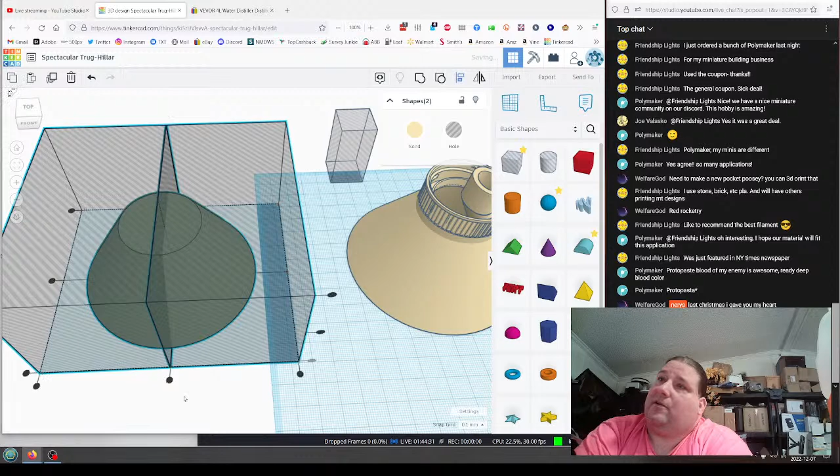Center the whole mess. That is not what I asked you to do. That is so not what I asked you to do. Center this way. And now cut it. Now we have our piece. Now we need to split this in half, because if I resize it, it's going to distort it.

So we need to make this bigger than this half, so that if it moves a little bit, it's no big deal. Control D, flip it this way. But I need to make this 57, this one, 57. Now they're the same size. Join these 2 pieces together. Center it.

Now separate it. Hide this one. Duplicate this one. Change the color to something else. Join this with this. Now bring back that other piece, join this with this. Oh, I thought I explained that.

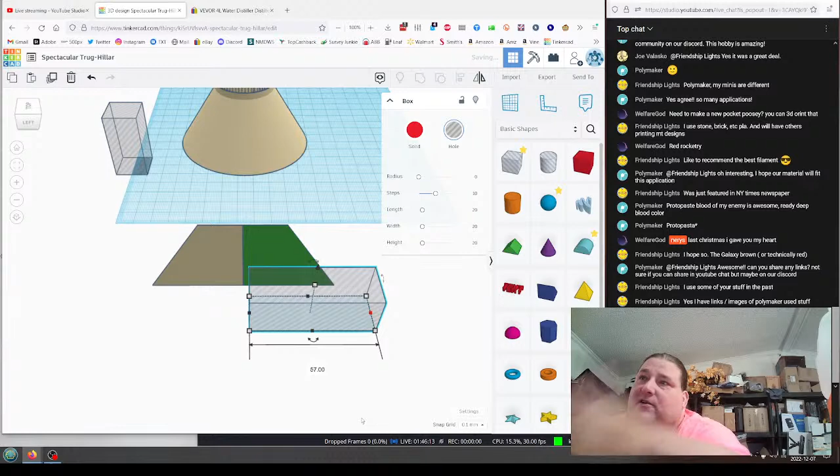Okay, so in order to make sure this is middled correctly, because we can't use numbers exactly because this might not be an even number, I put down a box this way, and I make sure it's bigger than this box, but also an even number. So I'm going to use 57. Okay. Now I take this box, I duplicate it, and I stretch it out this way, also 57 millimeters. So now this is two 57 millimeter boxes, and each of these halves is exactly 57 millimeters.

I join them together. Okay. I then take, let me do this again here. Control D, join. I then put these two together like this. Make this box bigger than this. Okay. Let me move this out of the way. So now I have this and this. Now I'm going to align these two so they're centered. There you go. Now this piece is centered in this piece.

How do I find the middle? Well, remember, this is two boxes, and they're both exactly the same size. So now if I select this box and ungroup them, boom, that's the exact center of that part. Now to create the two halves, I have to duplicate it. So I have to hide this in order to gain access to the part inside. Okay. Duplicate that part, change its color.

Okay. Now I'm going to join this box with this box, with the trapezoid, cut it in half. All right. Now restore the hidden box, join this box with the other half, cut it, and now you have two exactly identical parts cut in half. Now the reason you need that is that I need to translate the edge of the model. I cannot resize the edge of the model.

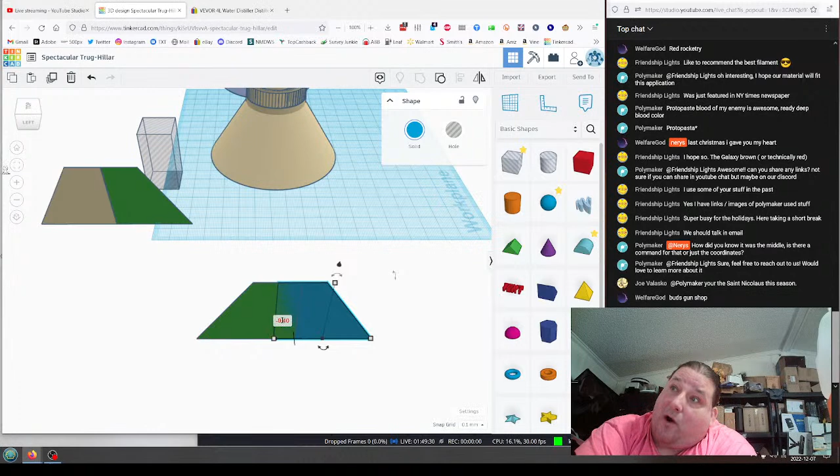What this is saying is that I have moved this part 9.4 millimeters away from where it was before, and it's in the negative direction. So now I'm going to change that to negative 0.75. Now I've moved that part exactly negative 0.75 millimeters X that way. Now I need to do the same thing for this side. Grab it, shift key, move it an arbitrary distance, 0.75.

Now the reason is that I needed to move this edge away from this edge without changing the relative distance, the relative alignment of this edge and this edge. That's why I have to bisect the part and then shift it. Because otherwise, if you try to scale the part, this dimension is going to scale differently than this dimension. Because when you scale, you're scaling by percentage.

So 10% of this is smaller than 10% of this. So I have to translate the part, not scale the part. That's why we had to go through all of this bisecting it. Now I can join it together. Now I want to create an array. First, we're going to do a lighter color so it's easier to see.

So let me get rid of all this extra goop that is in my way. Put you out there. Let's bring you over here. So now I need to create an array, and I've decided on 16 ribs. Yeah, this here, if you haven't, I'll show you what I do. So this here is all vase mode, except for the bottom 8.5 millimeters. The rest of this model, with all of this geometry, is all vase mode.

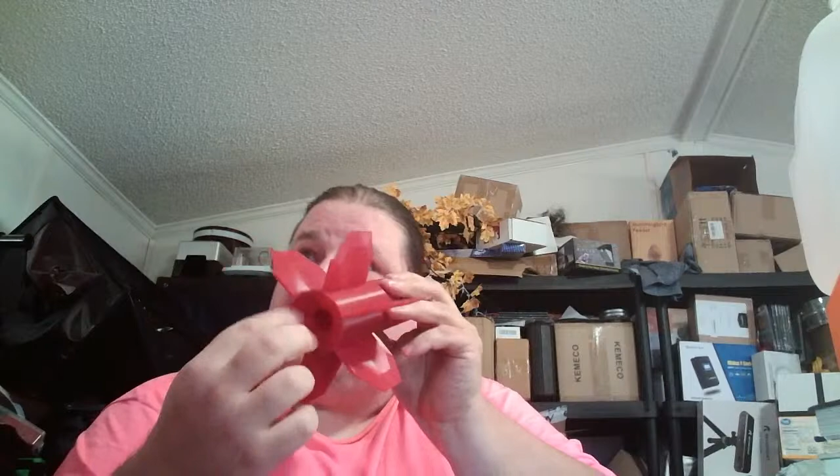You can see the inside diameter there is smaller than the outside, including this bay area here for the parachute to sit, the smaller area for the motor mount tube to sit. There's going to be 2 holes in here for your launch rod to go through, launch lugs to slide it onto the launch rail. That's this thing here. So these 2 little launch lugs are actually built into the model now.

And so this entire model, the whole thing, prints in vase mode, including all reinforcement structures, rigidity additions, everything. The whole thing prints in vase mode. So first of all, by having multi-wall, yeah, there you go. So you can actually see the ribs. See how there's ribs inside there? Those ribs reinforce this, making it much, much stronger without breaking vase mode.

Well, that's what I'm doing right now. I'm adding ribs to this model here. So right now, if I tried to print this in vase mode, well, first of all, it won't work because this is one plane and this is another surface. You have two surfaces here. That won't work. So what I can do, though, is I can take this and I can cut through the wall like that. And that will connect this inside surface with this outside surface, which makes it vase mode compatible.

Now, the problem, though, is that you still have two thin walls, and those walls are not very strong. So what I do here, I can show you on this model. You can see here, see how you got these ribs? Those are cuts. I used this shape here to cut ribs into this model. Oh, I'm sorry. So I use this as a cut tool to cut a hole through this wall. That connects this surface with this surface, which makes it vase mode compatible. The problem is it won't be very strong, especially using a 0.4 millimeter nozzle, because you're going to have two thin 0.4 millimeter walls.

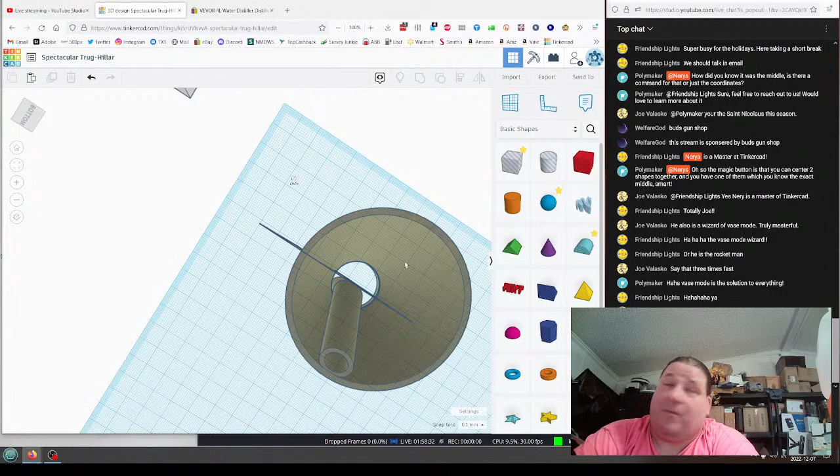Now a funnel doesn't have to be strong, but you're going to be manhandling this funnel. You're going to be screwing it onto a milk bottle, popping it onto a milk bottle. That might eventually break. So to add some rigidity, I do the same thing. I make a cut through it with a plane like this, except I don't cut all the way through it. If you look here, you'll see there's still a little gap between this slit and this outside surface. Now, 100% of that will be filled because this gap is 0.8 millimeters thick. The outside wall is 0.4 millimeters and the inside wall is 0.4 millimeters, which means they will touch. And when they touch, they fuse together.

So when it draws this part, it's going to draw the outside wall, and then at one of these, which will be, let's see, this one right here. So you can see, this one doesn't go all the way to the edge, but this one does go all the way to the edge. So it's going to draw the outside of this model, one continuous stroke, then it's going to come inside, and it's going to draw this inside wall. Then it's going to go toward the outside wall, but only enough to touch it. And then it's going to turn around and come back, and then continue drawing the inside wall. Out, in, continue, out, in, continue, draw this outside wall.

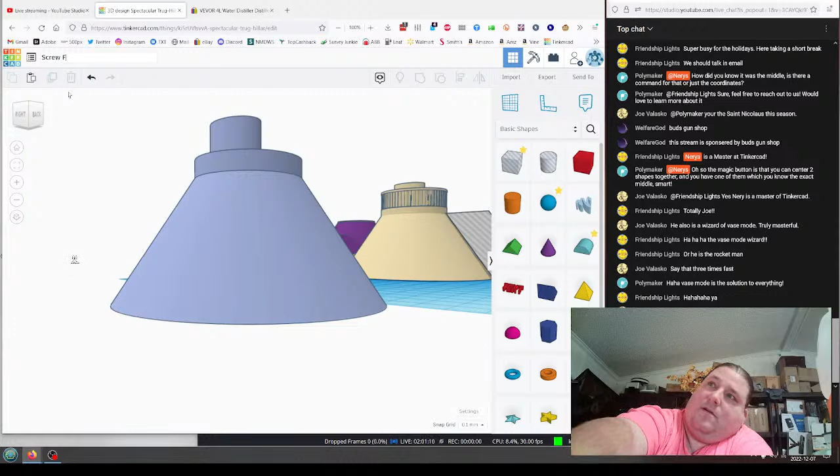So I can actually show you that in a slicer. So let's go screw funnel. Actually, that's not the screw. That is the snap funnel. God, dag nagget. Go away.

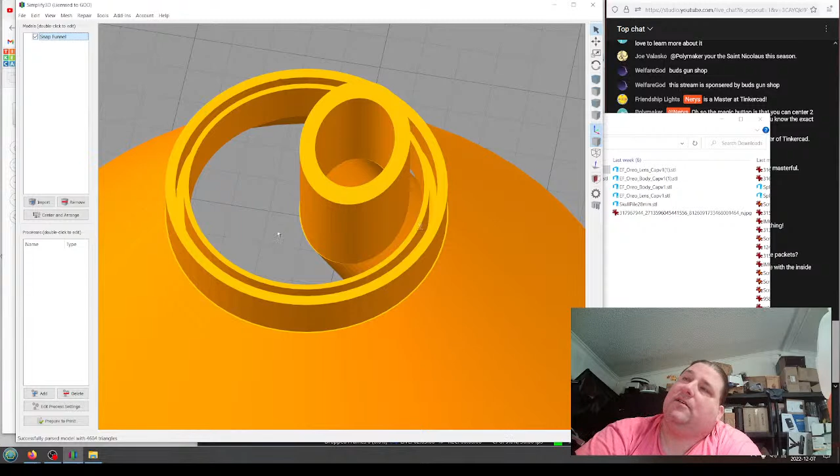And I might do that. Because in this case, do this in vase mode, but without the ribs. And that'll make it more flexible, so more likely for it to snap onto the milk jug. I might actually do that. But for now, we're not going to do that. Okay.

Let's see here. Turn that off. We do want to be in vase mode. We do want top and bottom layers. That all looks good. And we are going to stop printing at 39 millimeters. And then we will duplicate the process. We will switch to a normal process without vase mode.

Except now we're going to start at 39 millimeters and go until the end of the model. And no infill. I don't want to use any infill because I want this to be flexible. Okay. So that should slice properly. Yep, looks good to me. I don't see any errors.

Errors would be it jumps. You'll see it jump from point to point, which here it should do because this is not vase mode anymore. But I don't see any jump points inside the model, which is what I want. Okay, so now let me show you how that works. So here's the first layer, and you can actually see how it works. So it draws the outside all the way around.

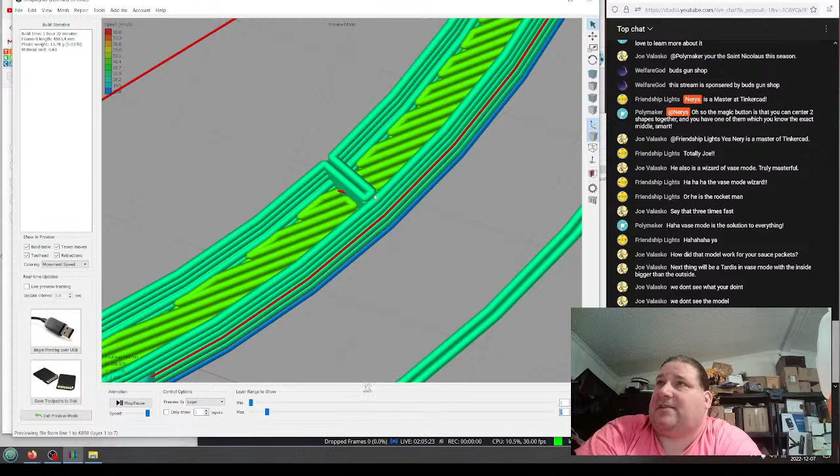And when it gets to here, it's going to... Wait a minute. Am I right here? Yes. So it starts here, draws the outside of the model. And when it gets to here, you'll see that one passes all the way through. See? But you notice these do not pass through. This is a rib. It comes out, touches the outside, and then goes back again. So I'm not breaking vase mode. This one here, however, passes all the way through.

I keep forgetting the Tinkercad mouse commands are different than the Simplify mouse commands. Same thing here. So after it comes around here and draws this shape, it comes inside. That's why it passes all the way through to link this surface with this surface. Goes all the way around here, creates a rib, goes all the way around, back to the outside. Now it continues drawing the inside of this surface.

Oh, God, I hate that so much. In Simplify 3D, the right mouse button is what you use to drag, to frame drag around. While in Tinkercad, the middle button is what you use to grab and drag around. The problem is if you hit the middle button in Simplify, it resets your view. So I have to remember to switch which key. I wish I could change the keys that Simplify uses so that I can make it the same as the keys that Tinkercad uses.

And it comes around, rib, rib, rib, draws all the ribs. What those ribs are doing is adding structural integrity. So those ribs are taking what should be a flimsy, floppy model and making it a very strong, rigid model. So this model is very, very strong and structurally sound because it has all of these ribs that don't pass through the model but make the model structurally sound.

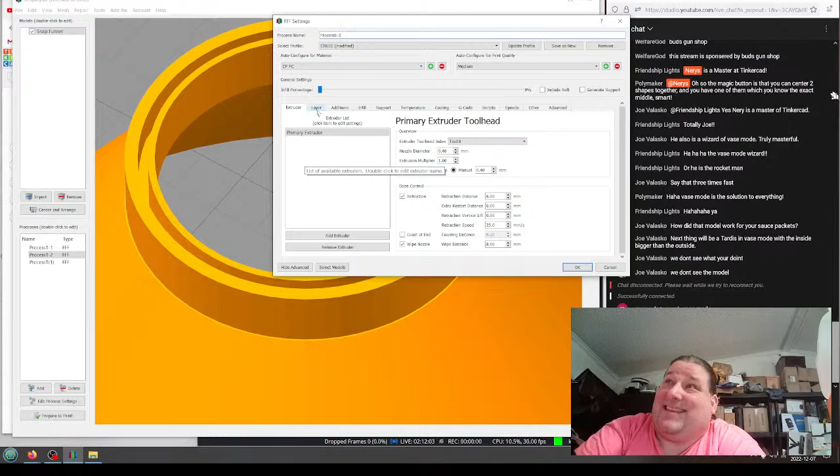Then I'm going to take this process, because Simplify3D tries to simplify things, it does things you don't want it to do. So I'm going to tell it to switch to single perimeter, 3 top and bottom layers, no vase mode, but I'm going to tell it to include a solid diaphragm every 1 layer. That's going to make those 3 layers solid. And now you're going to get something that looks like this.

So now when it does this, it's bridging from perimeter to perimeter, which will work just fine. And I'm giving it 3 perimeters to build up those solid layers there. And now it does the 3 perimeters. It's sitting on top of something that could actually hold it up. And now those 2 parts will work.

If you didn't do that, those 2 sections would probably just break apart. The first time you put that funnel on here and twisted it just a little bit, heck, even just pushing it on might be enough for that to just break away and break free. Now it's going to be nice and solid.

Now the only other issue is I have an overhang here. That overhang might be okay. It's going to be fugly, but it might pull through. Yeah, that might be okay. I might be able to get away with that. Technically, that's a failure because I'm printing in midair. But 3D printing is weird like that. You can do things that normally wouldn't work, and I think I might be able to pull that off.

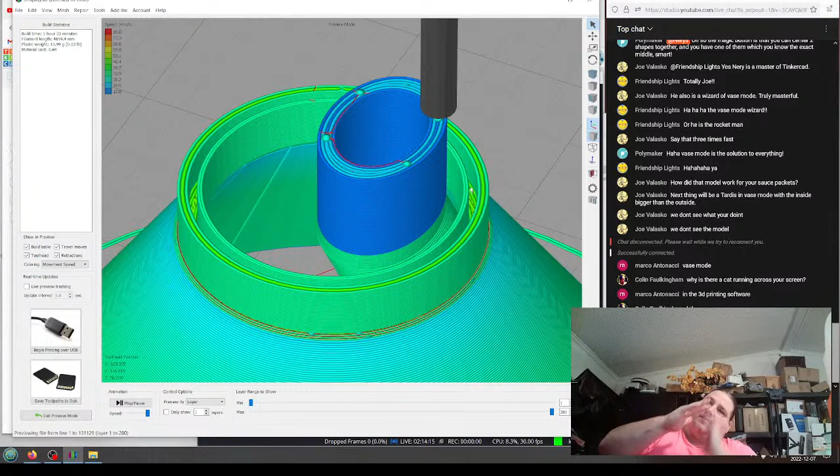That might be okay. The correct solution is to put a bevel there. So that basically it's doing this. And what you want is a bevel to transition from this to this. You want a little bevel there to make that transition between the 2 different sides. Otherwise, you'd have to put support in there. But yeah, good luck getting support out of that gap.

But that might work. That might actually work. Because you're going to have little bits stick out, and that's going to help support the next layer and the next layer. And that might actually give me what I call 3D printing fuzzy logic. That's going to make that section of the model squishy, because it's not going to be entirely complete. And that squishiness might be enough to make this connection work. So that might work, maybe. We're going to have to try it and see what happens.

But you see, this will only take 90 minutes to print, and it's going to use 14 grams of plastic. Not bad for what's actually a pretty complicated shape. So I could probably get it down to an hour. I could probably print this in an hour, and it'll only take 14 grams of plastic. So pretty hard to argue with that.

Now let's go back. We are still in that view. Yes. Let's finish the other one. So that one's done. We still need to do this one. So I take this piece here, and now the trick is there are certain things that you do that once you do them, you can't move the parts. Because if you make the parts non-symmetrical, then you can't center them.

So when you're creating these ribs to put inside the funnel, you have to make sure you have an even number of ribs. If you have an odd number of ribs, then the center point, the XY two-dimensional center point of the two models won't line up. So to show you what I mean by that, I showed you guys this before, but we'll show it again.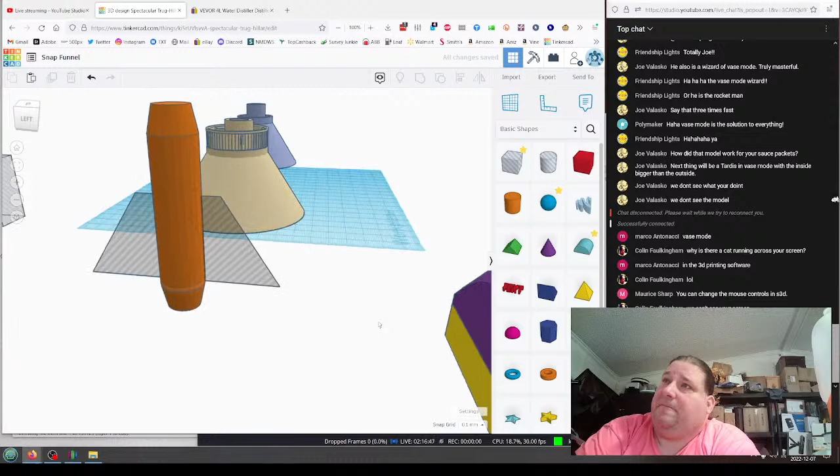Now what if I want 4 fins? Okay, Control D. Rotate 90 degrees. There you go. Now I have a 4-fin rocket. So again, I can take this, and I can do a center command. See? They're already centered.

No, I didn't do threads. This is a part I grabbed off of Thingiverse. There were existing models for these screw-on milk jug caps, but there was no existing model for the snap-on cap. But I did find somebody who made the male portion of the snap-on cap. They made a little pill container that you could reuse these existing caps to complete, and so I used that to make a negative mold in Tinkercad. And fingers crossed it works.

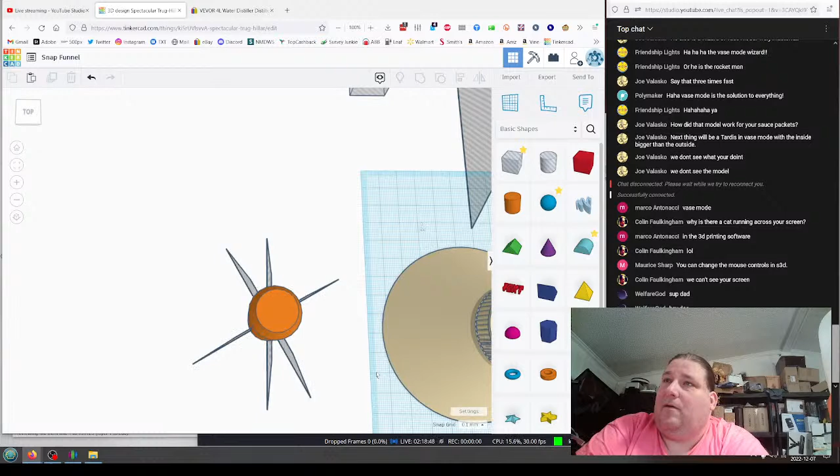Now, so this works for making 4 fins. Let me copy this since I'm going to need that later. So what if I want to make 3 fins? If I want to make 3 fins, I can still do that. So let's say I want to go, I think I need to go 30. Yeah. Control D. And then do this 30. That doesn't look right. What am I doing wrong? Oh, okay. I know what I did wrong. There we go. So here's 6 fins. No problem, right? Now, what if I want to do 3 fins?

Well, I make my 6 fins. Okay. I just start deleting half. So let's keep this one, this one. That means we're going to get rid of this half, and this half. Okay, so now we have a 3-fin rocket. But you have a problem. You can't center these. Let me show you what happens.

So now I have my 3-fin unit here, and I have my body tube. If I try to center these parts, they're not going to center. See? It does that. So why did it do that? Well, it did that because it's creating the center point of this XY plane. So half of 66.38, half of 76.65, which is going to be right about there. You can actually see it. You see? It thinks that's the center line right there. Well, of a 2-dimensional plane, that is the center of that 2-dimensional plane.

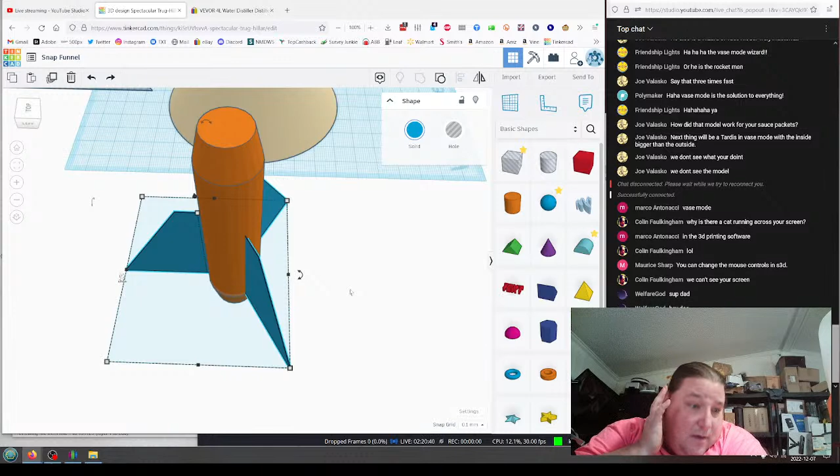The problem is I need to center this radially. I need to center this on a radial array. So there's two ways you can do that. Once you have them centered, and the way I did that was I created 6 sets of fins. 6 sets of fins have an XY plane that's symmetrical. So it's going to have a common center point to a cylinder, because this is not centerable because the X and Y dimension of this combined outline is non-symmetrical, 66 by 76.

However, if I have 6 fins, like this, and I join those 6 fins together, those 6 fins form a plane that's symmetrical. Oh, actually, it's not. Well, isn't that weird? Well, actually, that does make sense now. So I don't know what the hell I'm talking about, but the result is the same. You need an even number of fins. You can't have an odd number of fins. An odd number of fins is not going to have a common center point to a cylinder. An even number of fins will have a common center point to a cylinder.

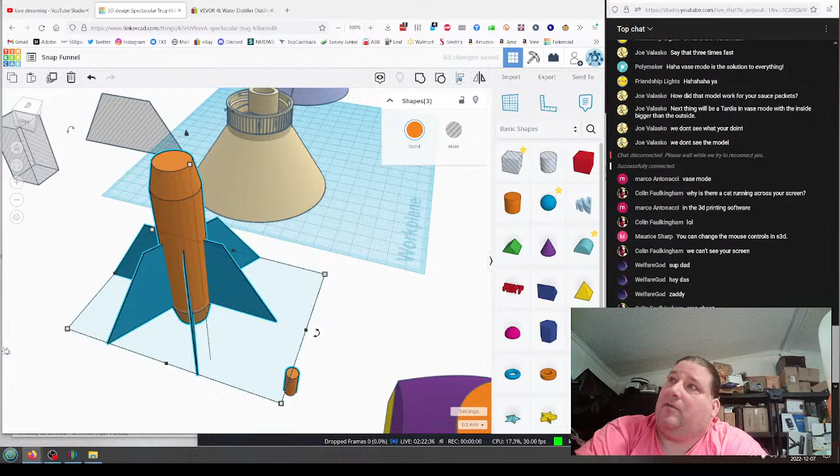So if I were to move these, I can recenter them just by doing that. And now they're centered again. So a trick to allow you to do this is to create a little cylinder, just something skinny and small. So let's do a little cylinder here. And what I'm going to do is I'm going to move this cylinder below the model, out of the way. And I'm going to center it on the model. Just like that. So now that cylinder is centered.

Now I'm going to split apart my fins. And I'm going to get rid of the excess. So I'm going to get rid of these 2 green fins. Get rid of that one. That is not what I wanted to do. I want to delete that fin. And get rid of that one. Now I take those 3 fins. Hold down the shift key. Select all 3 fins. Join them together. And then I'm going to select my little sacrificial cylinder down here. And I'm going to join it to that too.

Now, that cylinder will always stay in the center point of the fins. So if I move this, see the cylinder goes with it? Okay? Now, you still can't center these. If you tried to center these, you're still going to get this.

Hey, Sarah, what's up? Probably a 3X. Yeah, he's a little fatty. Yeah, actually, that's probably a good idea to get him something he can wear. This is pretty easy to be on the mark there. Yeah. All right. Bye.

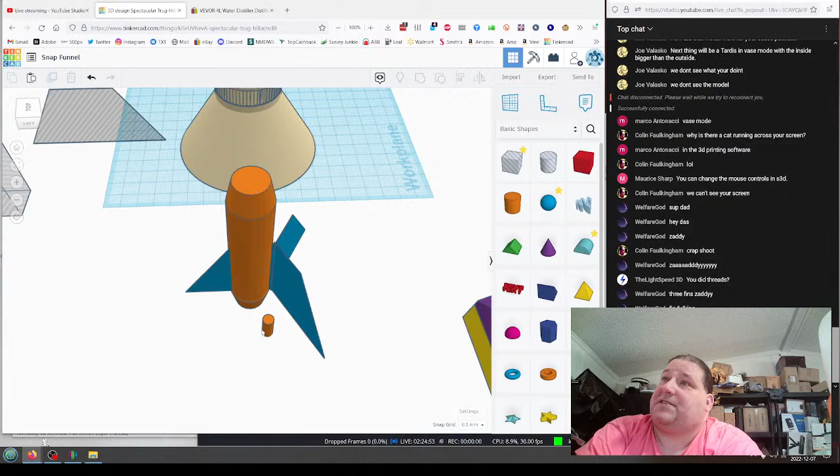So how do you center this again? Well, that's actually pretty easy. What we're going to do is we're not going to move the fins. We're going to move the body tube. So we're going to select the fins and we're going to decouple them. So now this cylinder is now separate. Now, it's very important at this point. You cannot move the cylinder or the fins. If you move the cylinder or the fins, you're going to break this. So we select this again.

We're going to do the align tool, except now we're going to tell it we're going to move everything relative. We need to move this cylinder relative to this cylinder without moving this cylinder. So we select this cylinder, hold down the shift, select this cylinder. All right. Now we go to the align tool. There's a little trick in Tinkercad. If you hold down the shift key and pick one of the parts, right now it's going to move both of these parts relative to each other.

So if I want to center this part on this part, it's going to move this part closer to this part and this part closer to this part until they're in the center. But if I know this part's in the right spot, I want to anchor this part and not move this part and make this part do all the movement. So you hold down shift and you select your anchor. Now everything is going to move relative to this part. So now only the cylinder moves relative to this part. Now they're centered again. Now I can take my fin unit and rejoin it with my little extra tube there so that I don't lose that virtual center point.

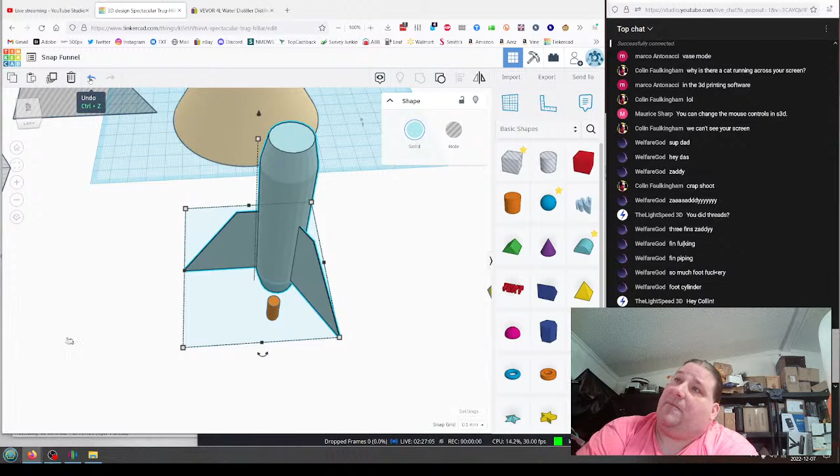Now I can export this model to my slicer or whatever I'm going to do with it. And then I can come back in here and undo, and get back to where I was. There we go. Now my anchor is attached to my fins again, so that if I ever accidentally move something, I can put it back. I have this common center point to use to move the parts back together again. So that comes into play when we're doing this. I'll show you. So first thing, we're going to create our array.

So I'm going to Control D, which is going to duplicate the part in place. I'm then going to move it, I believe it's 22.5 degrees. Now, that was one command I gave. I moved the part in one single command. If I hit Control D again, it will repeat that one command for each duplication. So if I hit Control D again, it's going to move the duplicate 22.5, and Control D again, and again, and again. There you go. I just created my entire array.

And because this part's symmetrical and this part's symmetrical, I can join these together. So let's turn this into a solid, join it. And now I can join this part with this part. But first I have to center them. Center, center. And now if I make this hollow, you'll see that our little vanes here will cut into the model. But we need to make a few changes. So first things first, we need one of these vanes to pierce the outside wall.

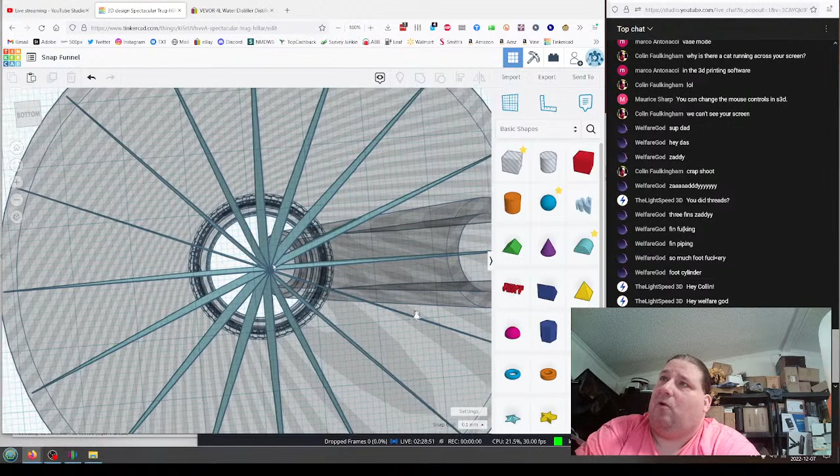So the way we're going to do that is I'm going to decouple these. Now that these are decoupled, it's important not to move them. So now I have just this vane. I'm going to Control D it. I'm going to hold down the Shift. I'm going to slide it sideways. So now it pierces the side of the model. But you can't center this anymore because this is no longer symmetrical. So it's important not to move these pieces. This I do want pierced, so I'm going to leave that there.

But I don't want these pieces piercing the model. So I'm going to separate them. I'm going to separate that one. Okay. I'm going to take this one and this one, and I'm going to join them together to make it easier to manipulate. So I need to get rid of from here up, so it's not chopping up my breather tube in there. So by having this hollow, by having this a cut tool, I can see where they intersect. And this doesn't have to be precise. It only has to be approximate.

So I'm going to drop a box in here and just bring it up until it's just below where those parts join together. Again, this doesn't have to be precise. I just don't want it bisecting that tube. Make sure it covers the entire area of the green vanes. The box is already selected. Select the green vanes, merge. That will cut them. See, now they don't bisect the tube anymore.

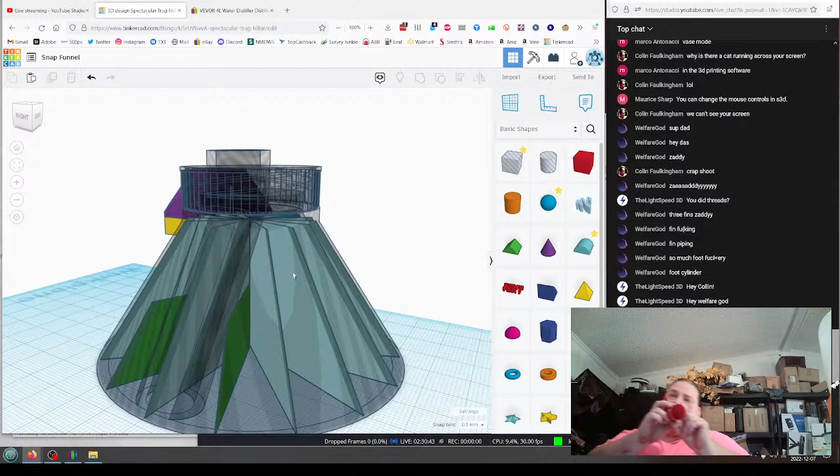But I still have my ribs here, giving me structural integrity. This little bit of unsupported area will be fine, as we saw. Oh, no. Round shapes don't have a problem too much with a lack of structure. So I still want that structure there for strength, but we're fine now.

Now I take all of these parts, I select them all, then I hold down the Shift key and I deselect the big part on the outside. I join what's left together into a single part. Wait until it finishes processing. Turn it into a hole. Turn this back into a solid. So now I have my cut tool that's going to allow the first 39 millimeters of this model to print in vase mode. All I have to do now is join them.

There you go. Now the first 39 millimeters will print in vase mode. And because I made sure to make that cut point 39 millimeters tall, I can use the exact same factory file to process this. So we're going to change this to screw funnel. We're going to export this. There we go. And now we're in here.

So that one, I'm gonna give that a gamble and try it. So we're going to call this snap funnel G code. I can now remove this and put the new screw funnel in place. I can use the exact same S3D processes to print this file. And there you go.

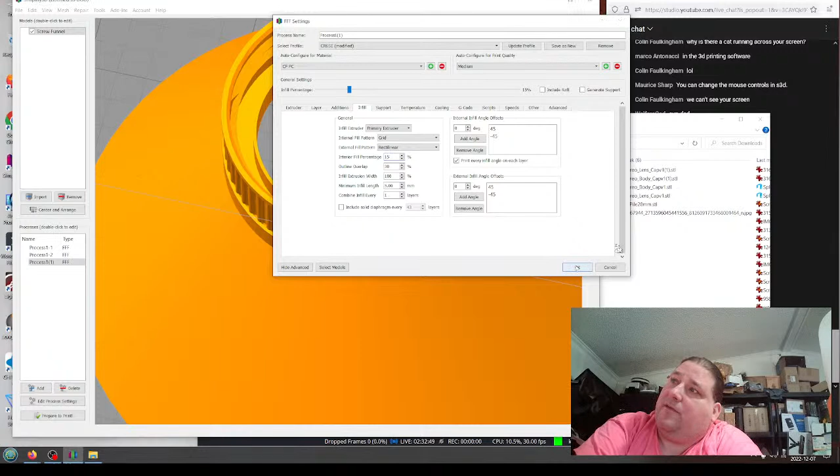This might need some infill. Yeah. I could probably get away without infill, but I'm going to add it anyway. Let's do infill. We're going to do grid. 15% is probably enough. Just because there's an air gap there. Most of it's thin wall, so it's not going to have any infill anyway. But now at least, there we go. We have a little bit of infill to make sure when it does that, it has something to sit on top of. And there you go.

That takes a little bit longer, hour and 45 minutes, and 17 grams of plastic. So that one will have a threaded cap for gallon jugs that have a threaded cap. Then the other one will be for gallon jugs with a snap cap that just snaps in place. But that should do it.

I'm not going to put these on Thingiverse yet until I verify these actually work. This one should work since it's an existing model that is already known to work. Although I do have to change the flow rate to be 0.95 for that section of the model. Otherwise, it'll over extrude. All right. I am satisfied with that.

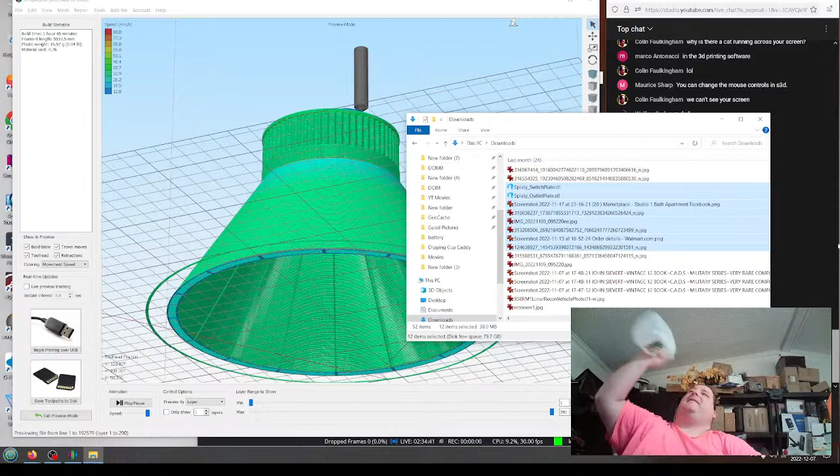Cat, what are you doing? He's digging in something. Ender. I'm going to beat him in the head with one of these bottles. I'm going to get him. He better hide. Little bastard, I'm going to get him.

I just had my other CR6SE fail on me. I'm pretty sure the feeder failed. It doesn't reliably grab the filament and feed it consistently. So sometimes it's like it stops extruding, and so you end up with gaps in the model. And I suspect the plastic for the feeder unit cracked, and so now the gears aren't tensioning properly to hold the filament properly. I suspect that's exactly what's going on inside there, so I'm going to have to replace the feeder. I haven't taken it apart yet because it's a pain in the ass to take them apart.

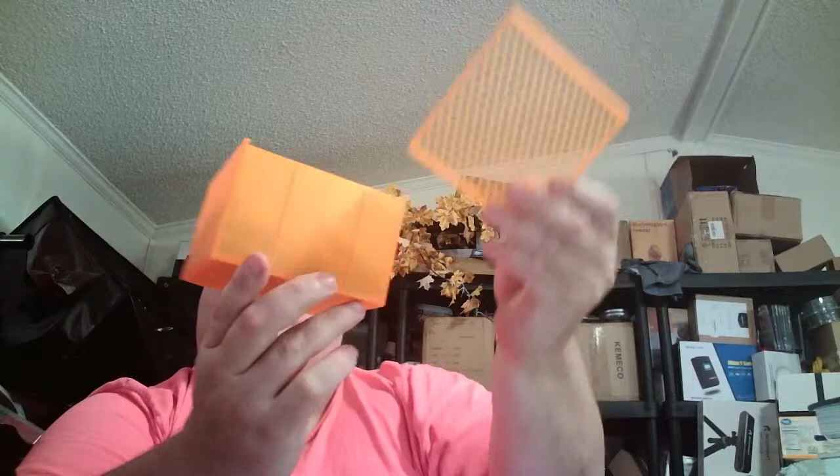Actually, I have. And here's another one that I did, that I converted. I converted a box a guy made into vase mode. So now, the little lid attaches. The bottom is regular print and the top is regular print, but everything in between is vase mode. You can see here's the ribs to strengthen the model to keep it straight. And the result is we knock 6 hours off the print time. 6 hours. Let's see. Oh, I can't do that yet. I would have to disconnect the microphone.

Oh shit, we gotta go, Michelle. All right, it's 1:10. She has a 2 o'clock appointment, so we're gonna scatter.

Well, that's the whole point. I want to make it efficient. Why waste plastic if you don't have to? There's an elegance to being efficient, and it's also fun. It's like a mental challenge, and it's also more user friendly for beginners, because a beginner is far less likely to have a failed print if most of it's in vase mode, just because it's a continuous extrusion. So even if you have a dodgy printer that's not quite configured correctly,

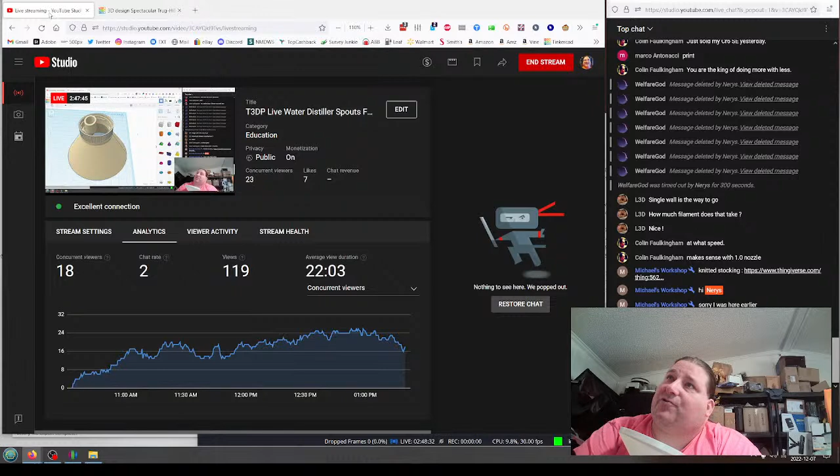See, the problem is I like to download all because it creates a zip file, which has a text file, which takes me back to this page, which means I can make sure I credit the modeler who made the file. But now that they're forcing me to download individual files, I can't do that anymore. So good job, Thingiverse. Good job. Just to try to force people to show ads. Maybe the ads are less intrusive and I can allow them. They had pretty intrusive ads at one point. But if the ads are less intrusive, then I don't mind them.